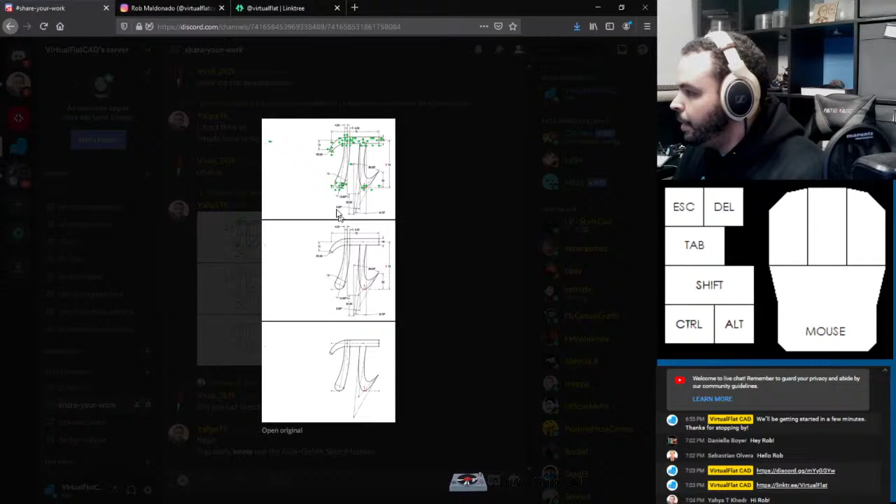Also, Yahya showing the method to his madness, publishing some of the dimensions that he used to make the pi. Very, very beautiful work there. And what I love about your sketch here in particular is that it's one thing to just go crazy with splines, but I can just see by inspection here that he uses mostly analytical geometry. Analytical meaning lines, arcs, ellipses, just those basic types. I see only 2 style splines there. So it's not only very good, very accurate, but it's just a beautiful example of generally efficient sketching. So, hats off to you there.

Sebastian: hey Rob, do you know if 3D Connexion gadgets are really worth it? 6 degrees of freedom mouse. Oh, that's an interesting thing to bring up. So, I'll catch you guys up if you haven't used it. So, what he's talking about, 3D Connexion with an X, I think. Oh, that is way spelled wrong. There we go. So 3D Connexion, they sell mice that look like this. So the idea being,

you have this device on your left hand, assuming you're right-handed like I am. If you're right-handed and use your regular mouse with your right hand, you'd have this in your left. So what you would do is you'd push this knob around. You can push it forward and backwards, side to side. You can twist it and also push it up and down. And what this does is that it links to the camera in Solidworks and allows you to rotate it very fluidly.

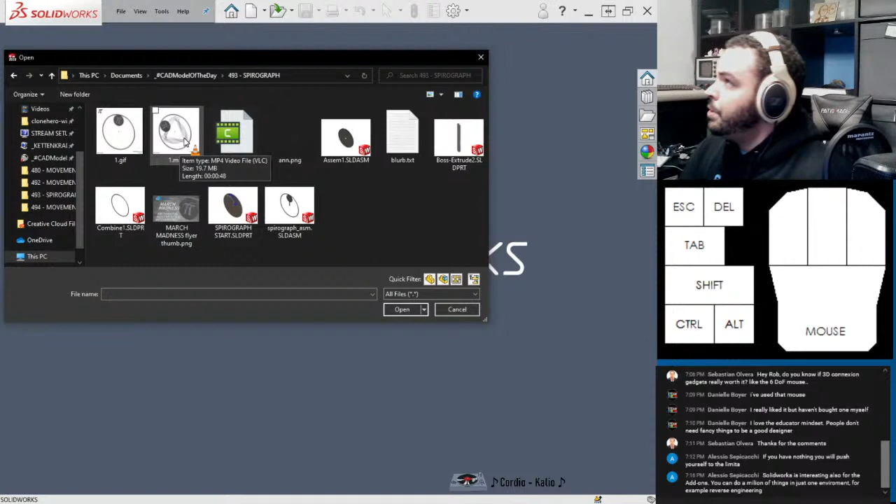What I ended up doing was I just kind of randomly picked values — okay, the ring gear is going to have 300 teeth, and the planet gear, technically, I said okay, let's make that 96 teeth, and let's put the spiral like this. Then when I ran the motion study, it turned out to basically generate a sunflower pattern, and I was really pleased with that. I just kind of published it as is. But I think this is going to be a good opportunity to really play around with some values and see what kind of shapes we can get out of it.

Alessio said SolidWorks is interesting also for the add-ons, you can do a million things in just one environment — for example, reverse engineering. Oh, totally agree.

I think one of the main benefits of SolidWorks, and this comes out as a double-edged sword sometimes, is that the integration between SolidWorks CAD modeling and SolidWorks simulation is so good. You can have a 3D model, click a button, do a basic simulation, is it not right? Go back to the CAD environment, make that thing a little thicker, hop back into the simulation just by clicking a tab, and run it again. It's so wonderfully efficient, and when it works like that, it's chef's kiss, beautiful.

Other things, I think with other software that's been quote unquote integrated, there's some work left to be done. The integration between SolidWorks and SolidWorks Visualize can be improved in my opinion. Many people, even ones that don't know the history of SolidWorks Visualize, can tell it was not previously a SolidWorks product. For those who don't know, SolidWorks Visualize used to be Bunkspeed, which, to its credit, is a fantastic photorealistic renderer. It's great - once you learn how to use it, you can create amazing scenes and renders with it. But the integration is very awkward between SolidWorks parts and SolidWorks Visualize.

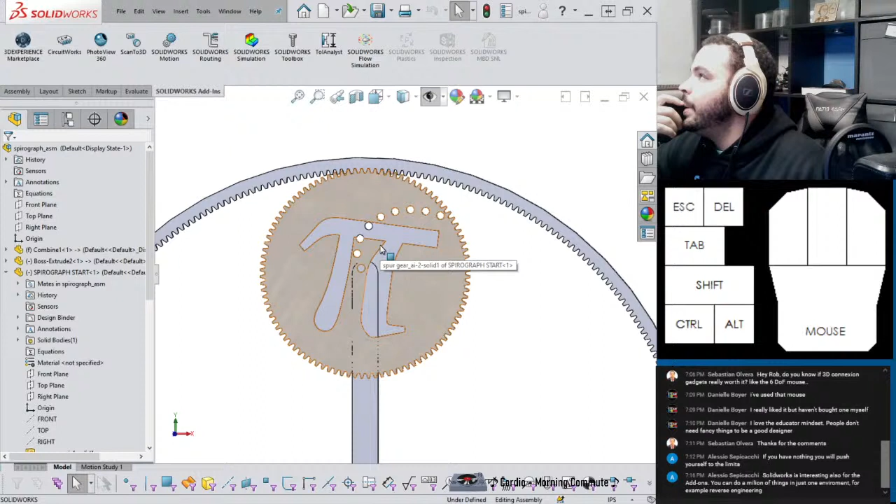But let's take a look at this doodad. One of the things I need to do, going back to what I said about basically just picking a bunch of random values - I used the SolidWorks standard gear set and then saved it out as a dumb solid so I can do all of these modifications to it. I want to see if I can get the ability to change different size gears, just to see what kind of effect that will have. So I think that's the thing I'll work on.

Well, actually, no - let's just see what I got here, right? Let's just go over what I did. Yeah, I know I'm all over the place, but let's review what I did for Pi Day.

First thing you need to turn on SolidWorks Motion, because the spirograph is done with the plots and results function of motion analysis. So you do need to have motion analysis, the SolidWorks Premium thing going on. It is what it is, but if you have it, make sure you actually turn it on so you can see the wonderful thing.

So, pulling back the curtain a little bit - in reality, when you have one of these spirographs in real life, it's kind of up to the user that when you put the pencil into the little gear and move it along the track, you're moving the pencil in such a way that the gear doesn't just pop out and ruin your drawing, right? But SolidWorks is not smart like that - you have to kind of tell it, go along this path, right?

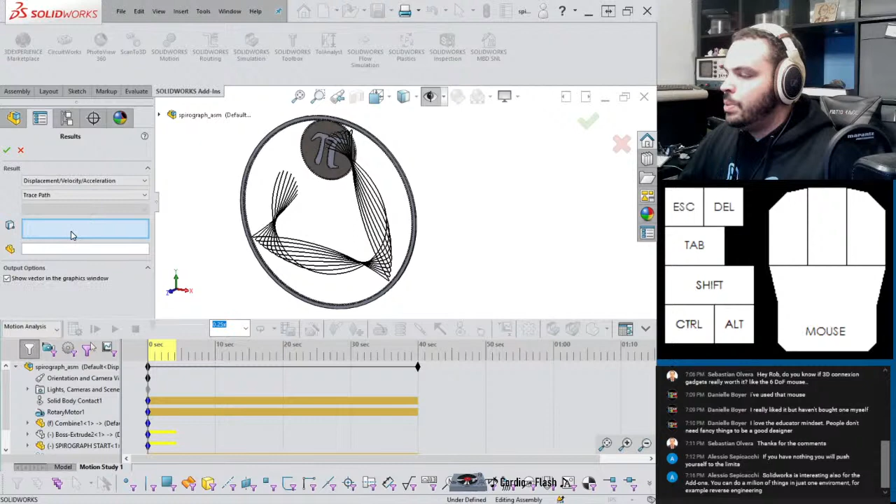In this box, you select a vertex, a point, or a sketch point that represents what you want to keep track of. So we could say maybe this little corner—where does that thing go? You can see because it's calculated some of it, it just shows up immediately. But if I hit calculate, you see now it's keeping track of that point too, which is making an interesting shape, like this triangle.

Okay, yeah, it's super fun to watch. It's honestly one of those things that I could just sit here and watch it all stream, but I know you guys didn't come here to just watch me watch a bunch of pretty lines.

But yeah, I need to reconstruct my model a little bit so I can actually pull a gear in from the SolidWorks toolbox, and then on the fly I can change the number of teeth the gear has and just see what it does.

So I think I did this in inches. This is power transmission—it's a gear, and it's a spur gear. I think it memorized my settings, but I'll make sure. Yeah, I used a diametral pitch of 24.

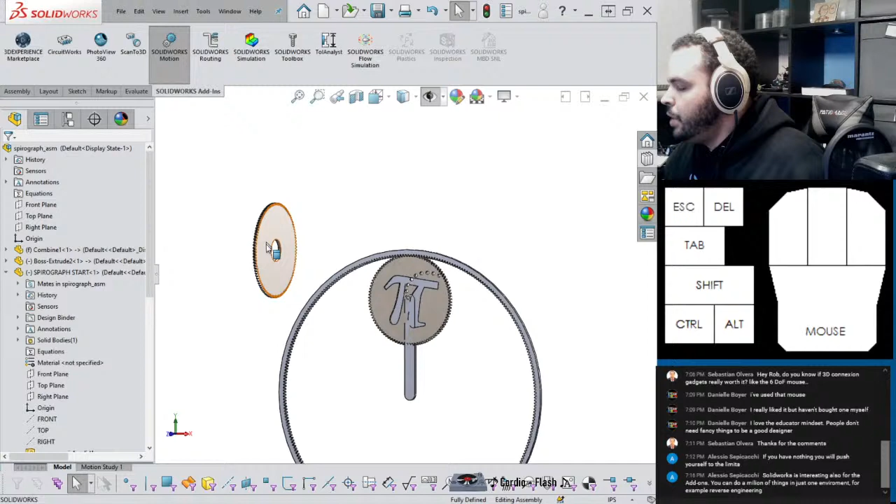And I might even remake this, since this is a dumb solid and won't be able to listen to any changes from this gear. So what I'm going to do is just suppress this. Sorry to see it go, but these things happen.

So now just starting to mate this in place. Okay. So I'm just going to try to get the teeth in there as best as I can.

There should be a couple of sketches in the SolidWorks toolbox part that should have the actual pitch diameter of the whole thing. So I might have to open up this thing read-only just to see what kind of sketches it has. Yeah, that's cool.

So what is this? Okay, this does not have what I want. So that's for the revolve itself. Okay, I think this is what I want—tooth cut sketch has the diametral pitch circle right there.

Let's see if we can get this to show up—that'd be pretty nice. And actually this one doesn't have it either, but I can add it, I believe, if I just go ahead and say this.

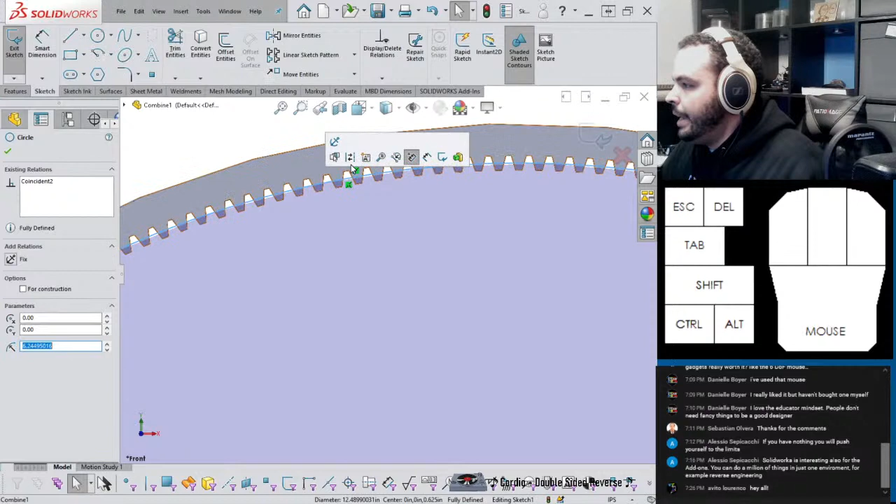But I'm making some edits first, just so we can have some real fun with it. I want to actually play around with a bunch of parameters and hopefully just see it spit stuff out in real time.

Okay, so we have that there. So perhaps I can say this and this be tangent, and that fails, likely because the sketch is in the wrong plane. So I can't really change the toolbox part, so I'm gonna have to change this—but practically no work is lost. I think I just have to change the sketch to this plane over here. Let's see what that does.

So with this tangent, then that works. So yeah, you see? And then—yeah, this is gonna be interesting.

Yeah, I might have to manually adjust the actual meshing of the teeth, which is fine, but the thing I want to happen automatically is the length of that basically driver arm that I just set to hide.

But yeah, so let me take this spur gear. So let's take the origin, and let's say you will be coincident to the right plane, and I'll go into mates and even rename this. And this is to reset the spur position. Oh, I typed in a plus, but that's okay. So that's something I have to remember to suppress when I try and run the motion study, but just so that it's not wiggling around on me. Having it stuck in place will help me for this next bit,

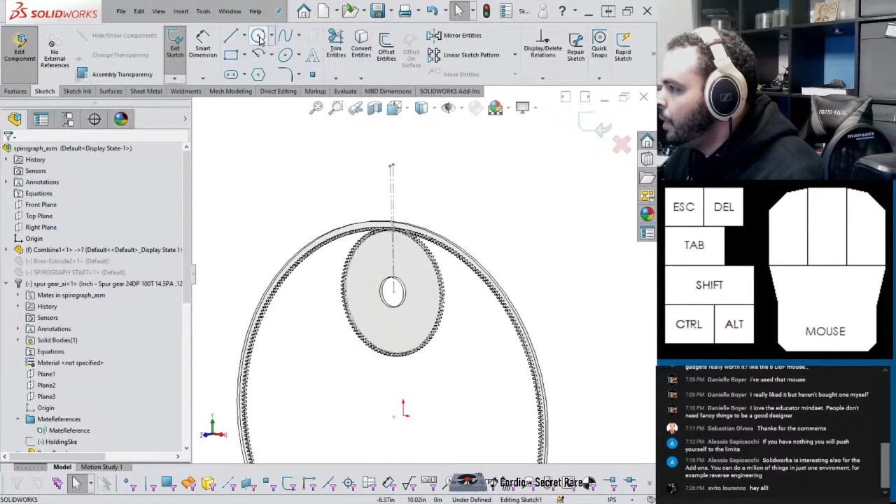which is to create a new part. So I will say, let's sketch on the assembly front plane. Grab a slot, and I need to be careful how I do this. So I'll put that coincident there, and I'll put this coincident to here. So two external references to basically define the length of this.

So why did I do it like that? There's something really subtle I did, and notice it's because I didn't really draw it like this. I didn't just draw it straight down and then do this. Difference being, just drawing it straight like that adds a vertical relation. And being that this thing has to rotate, this vertical might actually cause us trouble. So I'm trying to just use basically the perfect amount of relations. And then I can just arbitrarily define the radius. It doesn't really matter. It's critically the length and where the two endpoints are.

Alright, so, whoops. Actually, I need to go back to this edit component, because now I need to extrude. And let's see. Looks like my plane was a little bit off, but I think this might be fine. Yeah, because what I can do, and I'll show you. So let's just give it a thickness. This is fine, just leave that as is. I'm going to delete this. Well, not delete. I'll suppress this in place mate. I suppress because if something gets really goofy and I need to stick it back where it used to be, I actually can put it back where it originated.

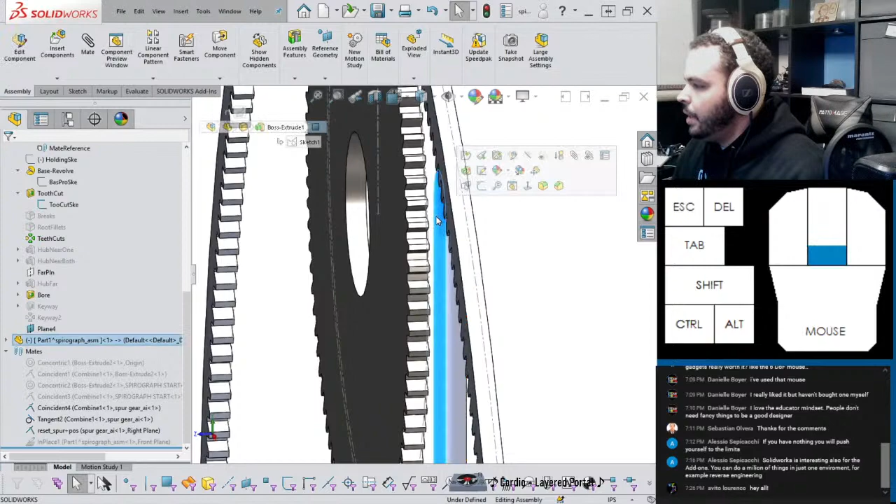So now I can just say, make that coincident, make this concentric, and this with the extrude to surface and call it a day. I could do that. Reason I don't is sometimes it can get a little bit screwy when you're trying to extrude to surface and things are moving around, because a lot of the times you need to see enough surface to actually go up to. Although I think in this case, since the up to surface is a planar surface, those are like the most well behaved. I think that's also an acceptable solution for that.

Alright, so what we should have here, I made that coincident, this coincident. If I turn off the reset spur position, I should have this rotating about this. Keep in mind, the spur isn't going anywhere because I'm actually going to use solid body contact to take care of the rolling. But what I'll do is test. If I go right click and say edit toolbox component, I'll actually make this internal hole smaller. So that's the nominal shaft diameter. Maybe I'll put that all the way down to like a quarter or something. Yeah, it's looking pretty good.

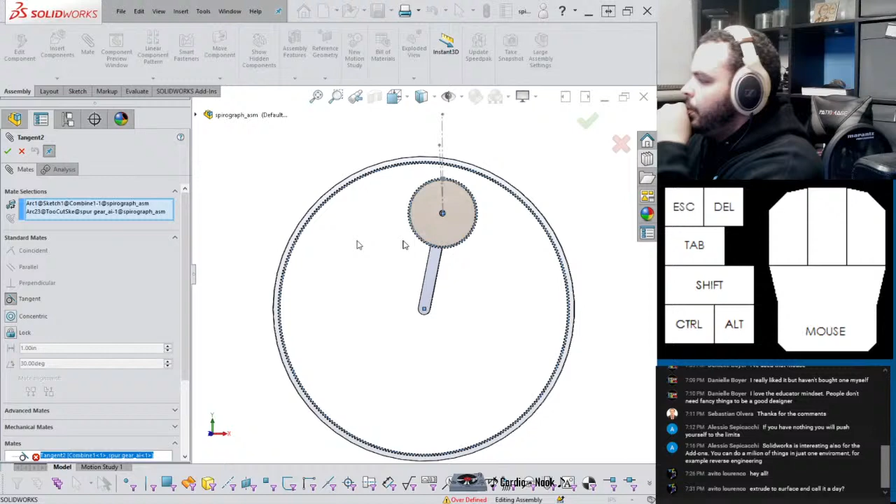Pretty good. But the most important thing is I take the number of teeth, and let's say I set that to 70. Okay, I heard a ding of sadness. So what is failing here? So what happens if I just hit rebuild? No, it hates that. Okay, so what did I do? I think I might have created a circular reference. Let's cancel. It's all good.

Troubleshooting 101. Can I show... What am I looking for? Hidden tree items. I forget what they're called, but maybe I'll see. But you can actually see the external reference. I think they're called pointers.

But I think what's happening here is that this gear can't be tangent to the teeth unless this member gets longer. But this member can't get longer until this moves to the teeth. So it's creating a chicken and egg scenario. And in SolidWorks, that is called a circular reference, and that's something you want to avoid. Even if they don't outright cause errors like this, they can be very brutal to performance, especially. So we'll figure that out here.

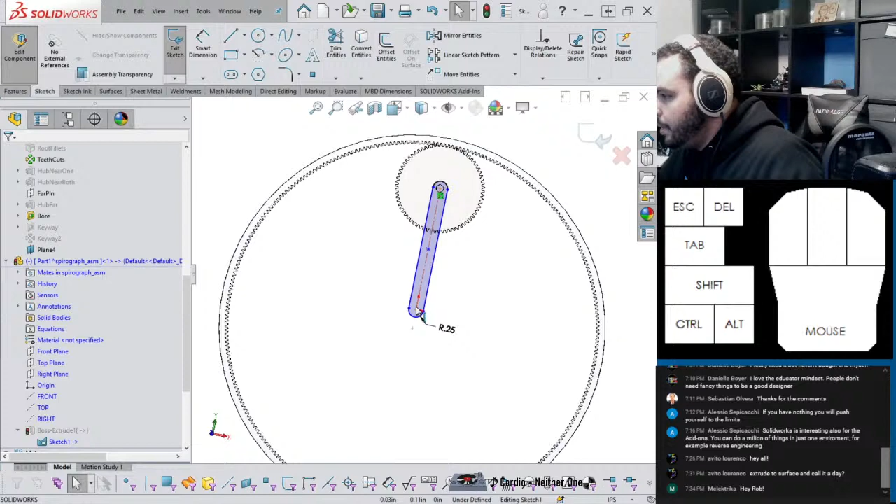Okay, so I think I know how we can fix this here. So I mated this, or not mated, excuse me. Let me be specific here. I put a relation to the endpoint of this line to the part origin. I think if I delete this and instead of grabbing the part origin, which is in blue, grab the assembly origin and say coincident, now that should create a case where it's able to stretch properly and not create circular references.

Okay. So let me try edit toolbox and just change the size of this. Okay, so we outright didn't get an error this time. But now the sketch is always going to the assembly origin. I might be able to turn this back on and get no errors. Okay, so far so good.

So I'll even turn it this way. So if I go edit toolbox component, and not diametral pitch, not that, just change the number of teeth here. It might be just something that I have to just turn this off so it rebuilds and on. Yeah, I'm good with that.

So there is a circular reference, and there may be a way of circumventing this. And yeah, I know there is, but you know, just wanting to get on with the program, I find that acceptable. So when I change the number of teeth, it's just gonna throw an error. But I turn this mate off so it can rebuild and just turn it back on so it sticks. So yeah. Let's save.

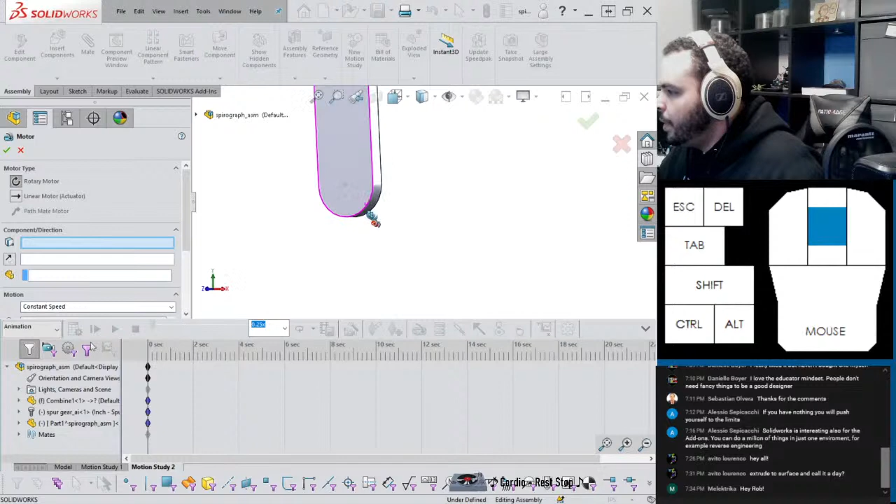And for our motion study, I might even create a new one. Assembly, new motion study. And we'll start by just driving a motor. 12. And say we want solid body contact between this and this. And then I want to hide this. Hide. So now this should go around once, and you should see the gear turning. So let's see.

Well, actually the frame rate is so low, I can't actually tell if it's working. So let's just let it do its thing here, and we'll take a closer look at it once it's finished thinking about it. Oh, I also have it at quarter speed. So let me replace key. Oh, I'm in animation.

I'm so dumb. Thank you so much, Alessio. You see, it happens to anyone. This is literally what I was talking about. When I say, like, yeah, it happens to anyone. It's been a long day for me. It's like, why is the frame rate so low?

And that appears to be working. Let me make that slower. Oh, if it wants to. Yeah, so now that's working.

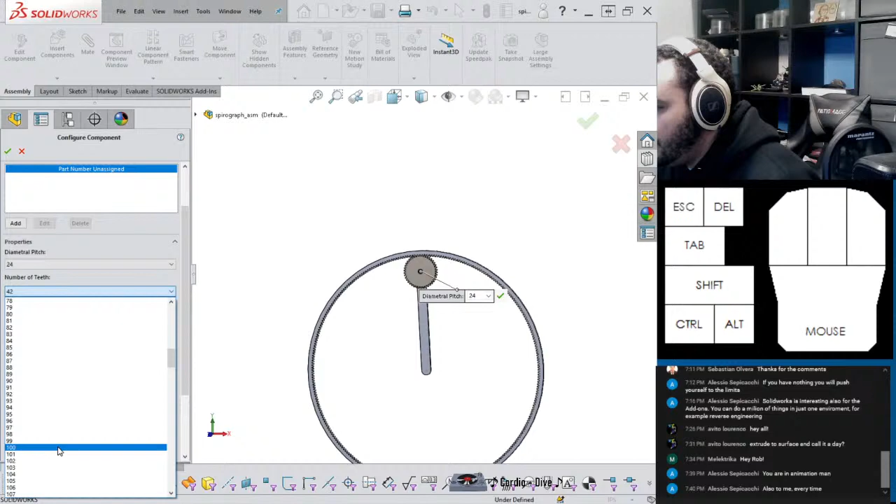So let's change the number of teeth. So 100, it's gonna error. It's okay, but we turn this mate off and then turn it back on. And then go here, the updated position, which is cool. That's fine. And now we should have this. Let's just replace the camera key so we see. Oh no, I have to recalculate. I hit play instead of recalculate. All right, so that is functional.

So what I will do now, this next part is going to be interesting because I'm not really allowed to modify this toolbox component. This gear is a toolbox component, and they're read-only. But what I will try is to make the actual spirograph bit. It's a new part. Sketch on the face of this gear and just say convert entities.

And this might take a second because there's quite a few teeth. I saved, so I think this will work out just fine. Yeah, this may not be the most computationally effective way, but we'll see. Boy, howdy, that's a lot of edges, am I right? So let's do that, because I think eventually... And what I might even do is have it extrude to the other way.

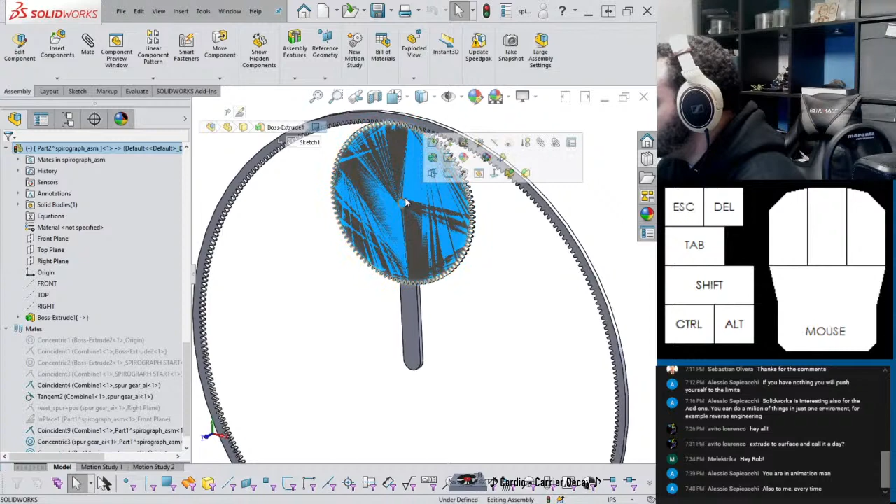So what I think I can do, the toolbox component, we can just hide, honestly. And let's just, again, test. Like the key to being successful with animation is frequent testing.

It's easier to kind of figure out what's going wrong when it's like one step at a time versus it's just happening all at once. So yeah, you see the entire gear change. So that is completely functional.

All right, so I think we're ready to make the spirograph bit, and this shouldn't take so long. How do I want to do this? Questions, I tell you, man. I might make that like an independent thing. So I'm gonna start. So the way I did this on the other one, I started with a small circle, like this, and then I used the helix and spiral command.

So it's going to be very important that I don't put any relations to any of these teeth, because if you recall, it's pulling those edges from the gear. So if I put like a coincident to this tooth and then I change the number of teeth, that specific tooth might be gone, and that's going to cause errors in this part. So I'm going to avoid snapping to any of these teeth.

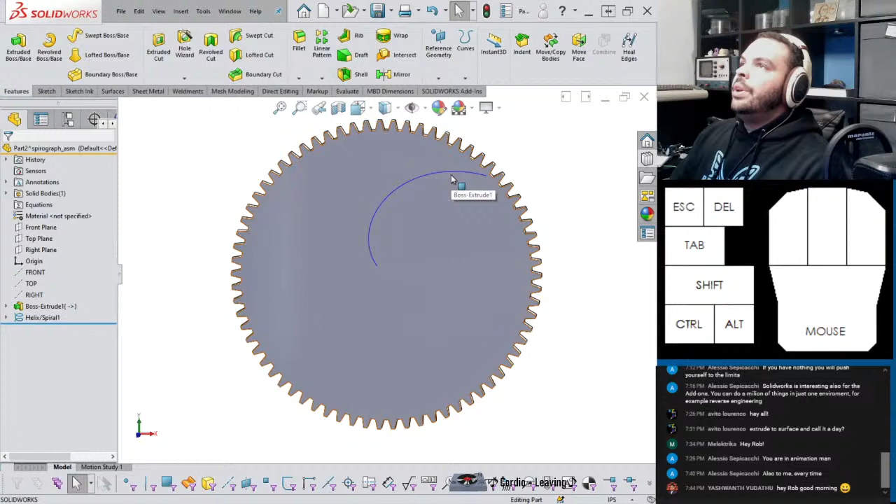So with the spiral, I can start with this base circle here and have a spiral just kind of projecting out, and you can kind of play around with different aspects. So I might just go in and manually change this as I change different gear sizes. But yeah, let's do that. Alright, so now we have a spiral. What do we do with it? And how do we get the holes that you saw in my spirograph?

So I'm going to start another sketch. Click on the spiral here. We're going to convert it. So that's step one. That's easy. Step two is something you might not have heard of, and usually I end up searching for this command. So I can say search commands, and the command I want is called segment.

And what segment does is allows you to put in a curve as an argument. You click on a curve basically, and what it does is it just splits it up into an equal number of segments. So I'll show that here. If I click on it, I can say, well, can you equally space 5 points about this curve? And you know, that's absolutely what I want. So just something like that, pretty much.

Avito, is there a more efficient way to rasterize a toolbox component? I think what you're getting at is, is there an efficient way to basically do exactly what I'm doing right now, where basically I'm taking a toolbox component and need to modify it in some specific way. Honestly, I think you could save the read-only part into a regular folder and then modify it how you want, but SolidWorks flags it as a toolbox part, and that causes some quirky things to happen. I think you could probably do a save as, but yeah, I just chose to go about it this way, I suppose.

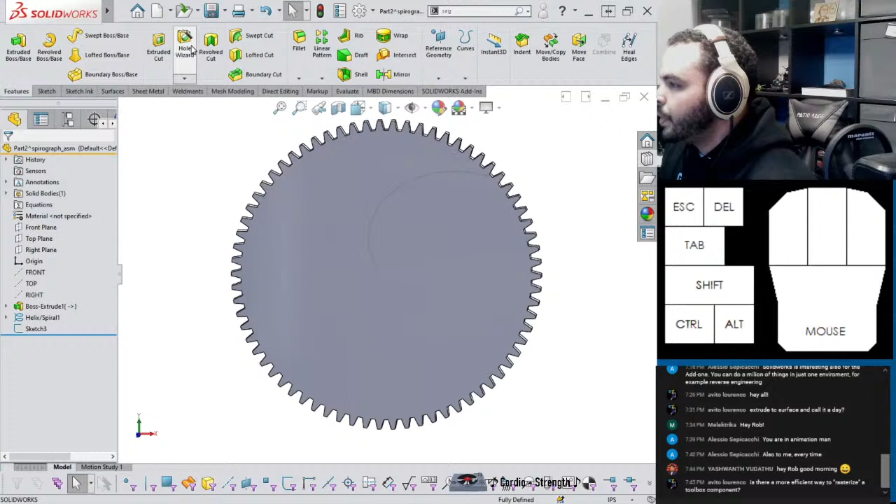Hole wizard. So I'll get some holes here. And for positions, I'll sketch on this plane. Oop. And just kind of snap these. I think that might be too close. And what I'll do is make these holes smaller. Okay, and that's a spirograph in essence, pretty much. So I can hide this. Well, actually, no, I do want to keep that around, but I want to hide the spiral. Keep sketch 3 around because I can actually pick those points when I do trace path.

So let's go back to our assembly, and we're practically on the cusp of just having everything we need. So going to our new motion study. Gonna have to recalculate. So that is rolling. That's cool.

You have to delete all references for the configuration and create a new one. Yeah, otherwise you screw up your toolbox. Yeah, Alessio has it right. I kind of just stay away from it. And you know what is interesting to note is that if you go into your system files, if you're brave enough to do that, here I'll show you something, if I can find it. I won't go too much out of my way.

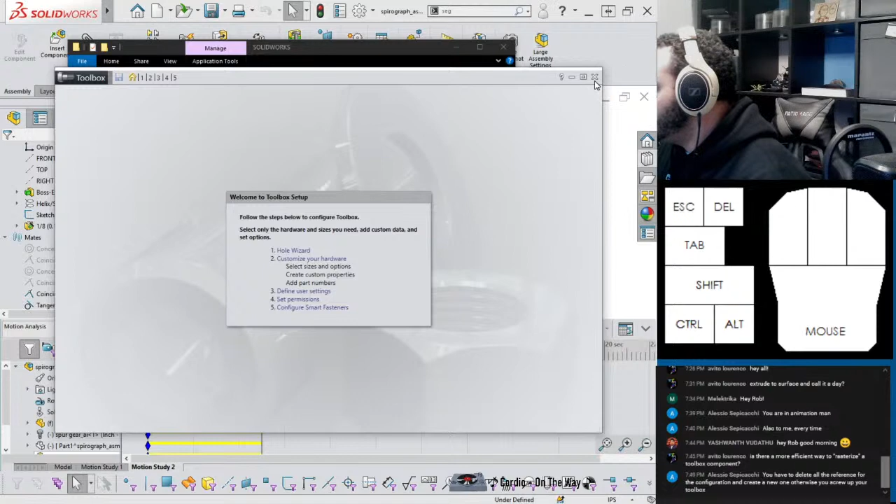But for example, if you go into your program files and say SolidWorks Corp, SolidWorks, there is an exe here. Yeah, this one, SLD Toolbox Configure.exe. So this is found in C, Program Files, SolidWorks Corp of your year, SolidWorks, and then this thing. So what this tool is, oh, actually no, that's not what I want. You can create new toolbox component. It's this one, Toolbox Updater. Is it this one?

There is an exe here that you can feed a toolbox component that you copy, and you basically say, I want SolidWorks to mark this as not a toolbox component, and then it just becomes like a regular part. That's something I would have to look up. I used to know it a little better when I was in tech support, but that is a tool that exists.

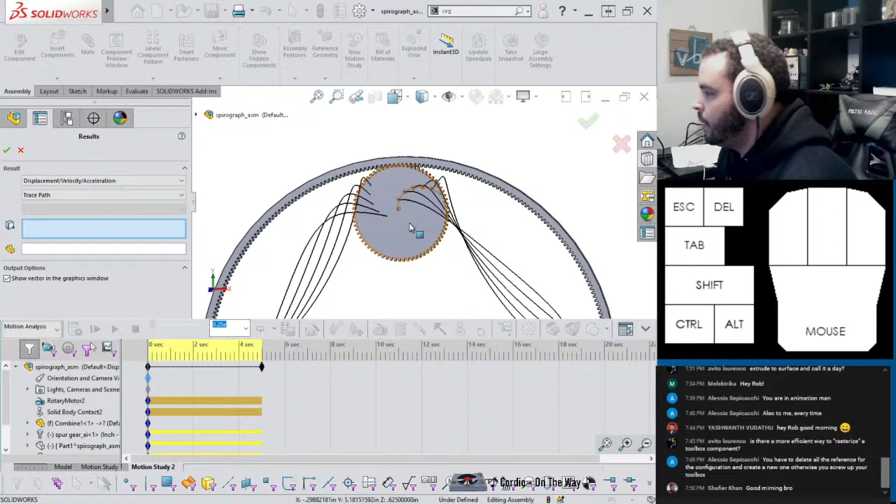And looks like we got one more, at least for the version of this that I have. Motion study. Oop, just kidding. This. Trace. Alright, so there's our paths. So let me get this in place. Replace key. And let's bring this out to 30 seconds. And let it calculate.

This is really, really cool. Yeah, so this is very similar to that sunflower pattern I was getting. But you can control how many points this has by varying the gear ratio, basically. So something I can do, I know the ring gear has 300 teeth.

Oop. No, I meant to click back into model. So if I go here to the toolbox, edit, and set the number of teeth to 100, which divides into 300, gives you 3. Off, on. Let's see what that does to our shape.

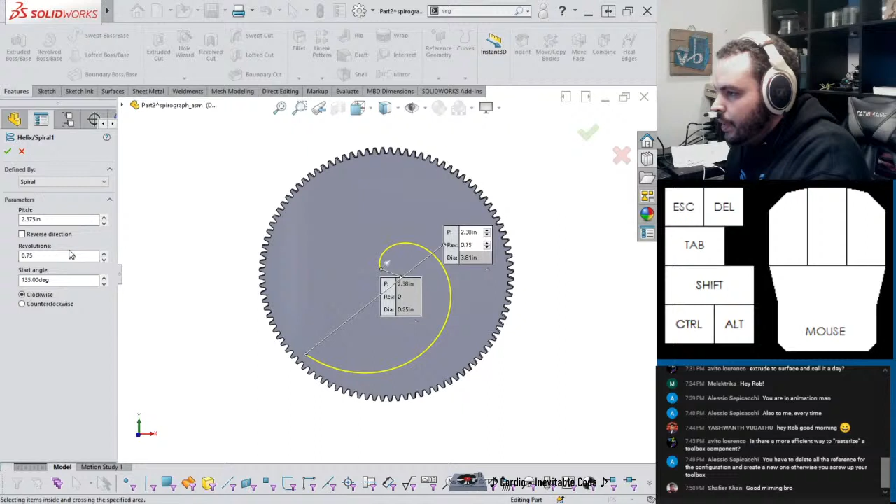So what happens if I bring the pitch down to 2, maybe the revs up to 0.5, I meant. Maybe a little more than that. Okay, so let's try something like that. So you see you get something like that. Because I used the segment command, it automatically updates. So we should be able to just go back into our spirograph and run this. Yeah. So now they're a lot more spread out.

All right, what else? So let's go back in here and say, oops, that's not what I wanted. Let's change the number of teeth again. So I bet if, instead of having 100, we have like 99, ever so slightly off. Yeah, let's give it a second to error out and we'll fix it right away.

So now we should get a thing with a lot of lobes. So it should be, yeah, slightly off. This one's turning out to be cool. Wow, those lines are getting kind of dense, huh? Yeah, and I could even let that keep going. I might even, instead of having this have so many lines, just hide all of these plots.

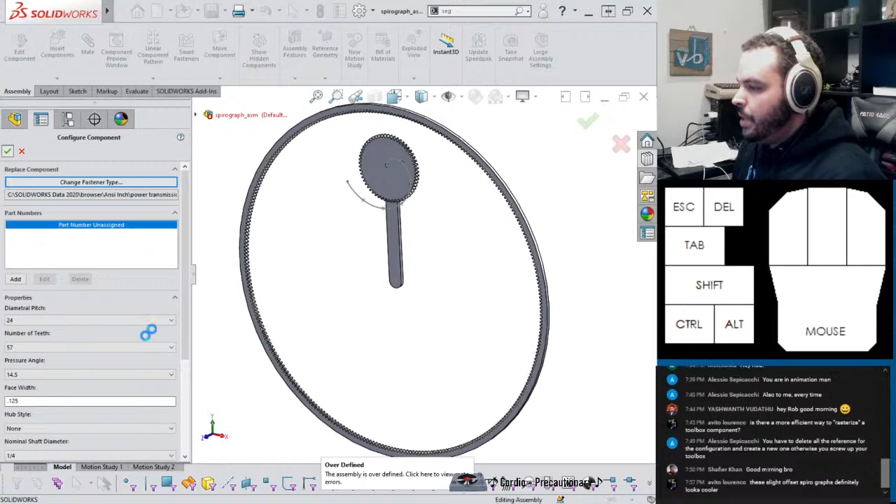Avito saying these slight offset spirographs definitely look cooler. Yeah, I totally think so. And I think it's really because... oh, that's really interesting. A couple holes failed. Oops, I did the wrong thing. Yeah, I think because they're so close it makes this very nice ribbony thing. So what I think is going to be interesting here is that the point we're tracing is actually outside of the gear, which makes the hole fail, but it's not against the rules in terms of tracing a path.

Let's see. Oh yeah, this is what I'm talking about. Oh boy. This one's really cool. Because 57 is just not very evenly divisible, this would keep going for a very long time until it actually meets back up with itself. I'll try something a little less stunted like that. And maybe I'll try with a point way out there.

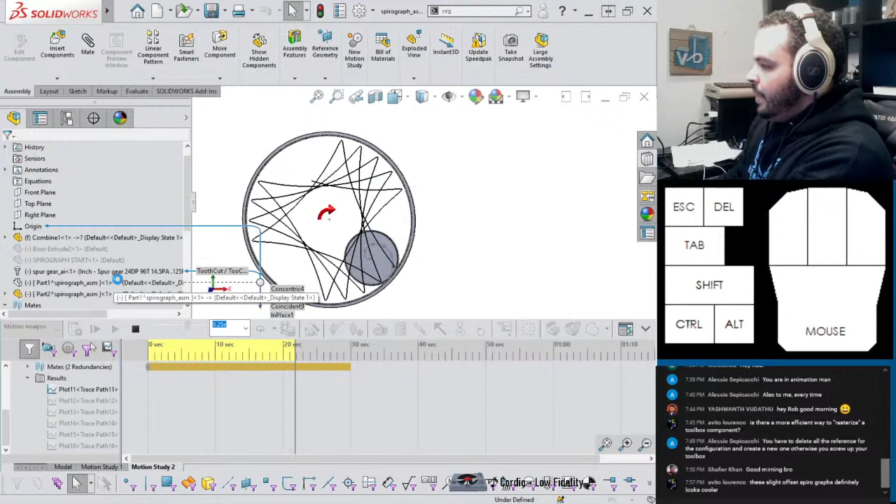So let's, not diametral pitch. In my post I actually had 96, so it actually makes 25 lobes. So the sunflower shape has 25 petals in it basically. I might do one or two more and then I'll actually get onto the CAD model today because I've been streaming for an hour now, but this stuff is so fun to play around with. Yeah, that's so cool. It's basically making a flower.

So put this here. Actually, let me go in here and say, with the helix, let's just bring this sucker way out. Actually the holes are okay with it, which is weird. I would expect this to error out, but okay. So the point we're keeping track of, I believe, is this one. This is going to be interesting. Whoa. Okay, I'm gonna have to zoom out a bit. Hang on.

I think I'll make this one my last one, but this thing is so cool. Oh, it's like making a donut. That's so cool. Oh god, that's so satisfying. What do you think about that, guys? I really like this one. I also like donuts.

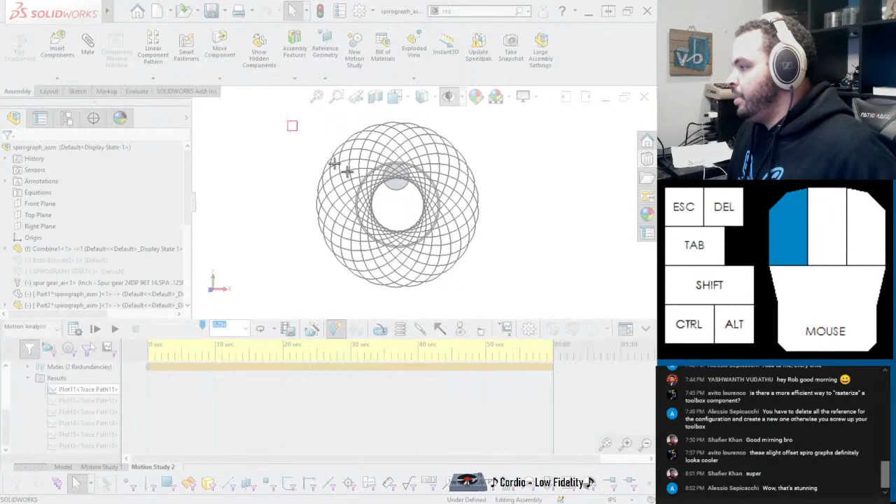I think that's a good one to leave it off at, as then I'll go to the actual CAD model right now, but let me know if you enjoyed that, cause I sure did. I really enjoyed that. Let me take a screen snap. I honestly didn't expect it to be this beautiful, but math is beautiful, man.

It's a shame that a lot of schools beat the amazingness out of mathematics and science because of a bad teacher, or a curriculum that is not accepting or inviting. That's why it's important, that's why I'm doing this here. This stuff is fun, and having free access to my videos is one thing, but just to have it be fun, you know.

Oh, sick. Avito, you said you got the email regarding my new SolidWorks user group opening. That's awesome, my dude. You're gonna have so much fun, I'm telling you. I don't know what your plans are after the pandemic is over and we can visit each other freely again, but once you get people visiting in person and showing off the coolest things, in-person demonstrations and interviews, it's a very fun place to be in. And I know I've talked at length about that.

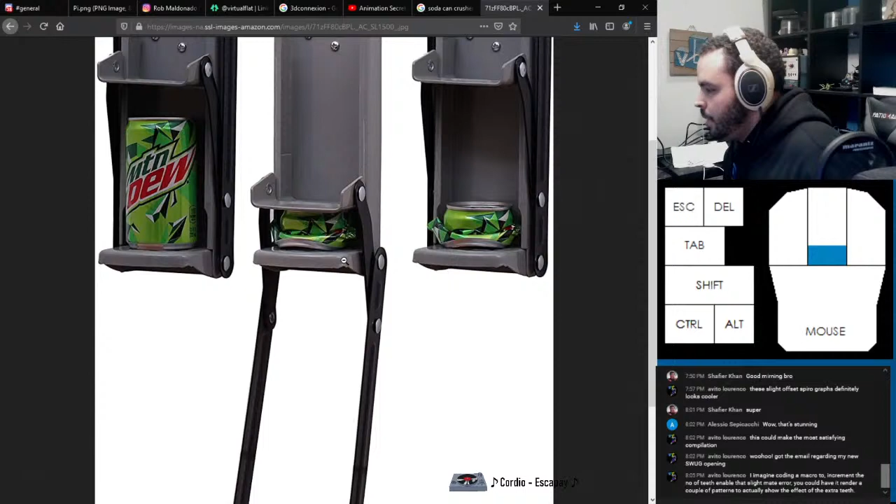Yeah, I think I'll use this as my reference image. This one's very nice, just to have it in its various stages of operation. So I think what I would have to start with, and I might have to just make up some dimensions here.

Yeah, this is totally doable. Let me move this to my other screen. Put that over there, and put this over here.

Avito, imagine coding a macro to increment the number of teeth, enable that slight mate error, and have it render a couple of patterns to actually show off the effect of extra teeth. Actually getting into macro writing is something on my bucket list. I've never done it before, but I think that could be massively helpful. I've just seen the amazing things people can do with macros, it's just one of those things I keep putting off, man.

Alright, so I'm just gonna start with the sheet metal base. So it looks like almost like a plate, it's very thick. So I'm just gonna call this 4 inches.

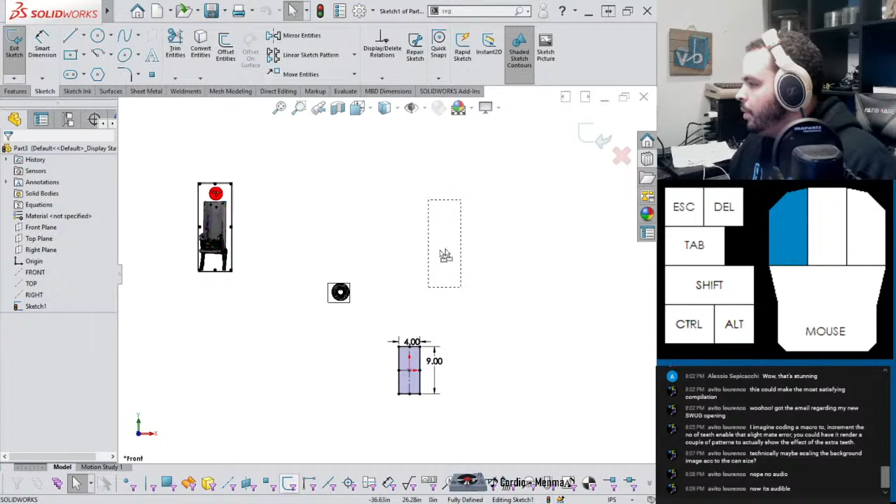Yeah, so the reason I don't want to use this as a sketch template is it's not like 507 Mechanical Movements, where it's just black and white. This is full color, so these kinds of things are kind of tough to sketch over. So, we're making the back portion.

And I think I'll just throw that to sheet metal, so let's use the gauge table. Whoops, oh, so I have to still select the table. Alright, steel, so now we should have another field come up. Let's try 10 gauge, okay, so that's pretty decent thickness, I'm cool with that.

Alright, so now we have the tabs that come out that actually capture the slider in there, so I'll accomplish that with edge flange, like this, and let's have the bend towards the outside like that.

Let me think here. Yeah, in the picture, I'm just going to pull this up. So I'm modeling this flange here, this one. It goes all the way down, but then I believe it stops to actually make room for whatever this thing is that I'm tracing.

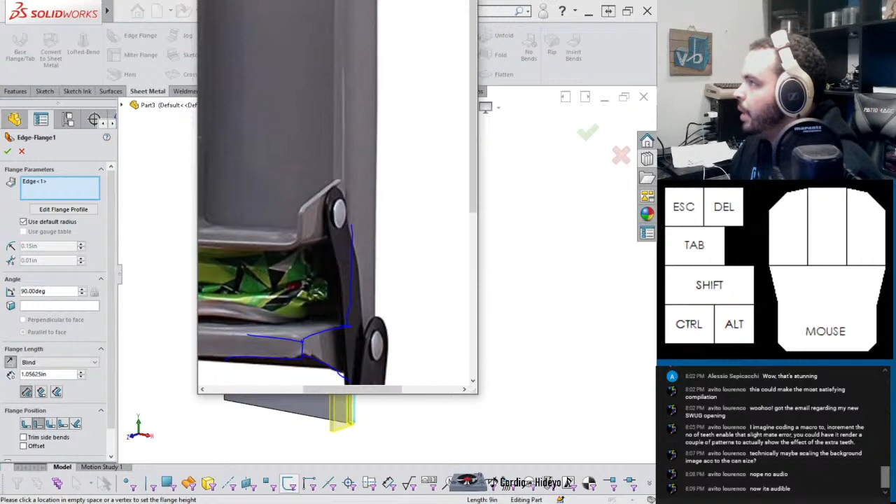Right now, I can do that by editing the flange profile, taking this and just kind of ripping it out of there. Now I can define it, like that. Sketch is valid.

Yeah, and I believe we can mirror this, so I won't bother doing it to the other side until I get this a little bit closer to what I want it to be.

There we go. Yeah, so I think one of the pieces of equipment I need to get for my stream is a mixer. I've actually had this where I stream to my friends over Discord or something, and the audio for the thing I'm doing will be a normal level, but it'll be way too loud for me, and that's what's happening here. But just putting the headphones sillily on my face actually works pretty well, so I'll just leave it at that.

Have the bend towards the outside. And actually...

So this ends a little bit, so I need to go back and edit. Although, I don't need to have it be exact, I can take some liberties. The important thing is I need something here to actually catch the slider. So I can do that.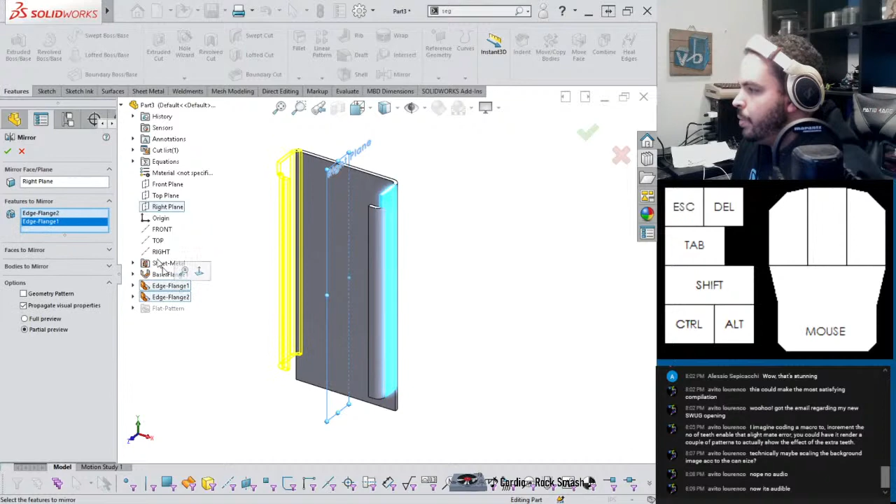We have something like that, and I actually may go for the mirror now, mirroring about the right plane. We also want edge flange 1, and let's give this a save.

Alright, and now to make this bottom portion here, I may just make it a solid and then just shell it, because this is clearly formed. This is not just regular bent sheet metal, and it looks to be formed.

So how can I do that shape? I will draw its profile as seen from the right plane. Let me adjust my mouse to Solidworks mode. Like that.

And I'm just going to give this some random dimensions.

Oh, hey Kuronite, good to see you. We are making a soda can crusher.

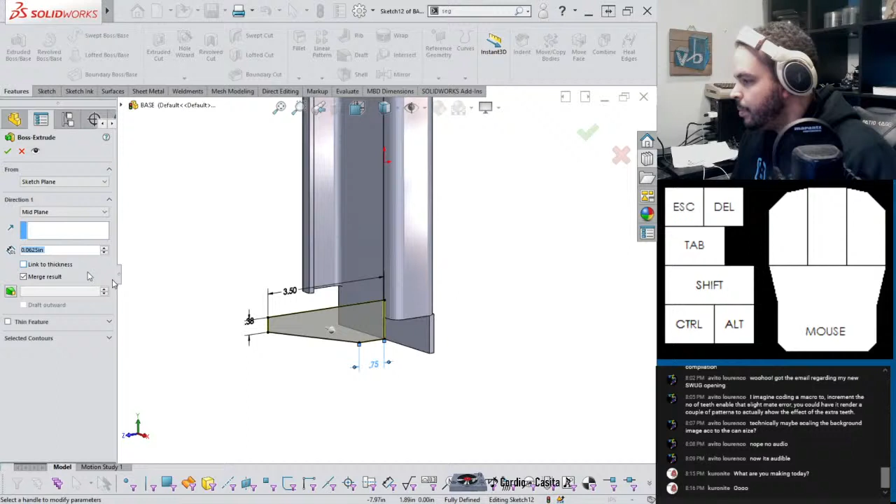For... uncheck merge. And, alright, how do I want to do this? Let me sketch here because I do want to make the end rounded. Let's get a 3-point arc, like that.

So if I can grab the midpoint of this and say coincident, that should put that fully in place. Then I should be able to go to extrude cut and say through all, and destroy all the material on this side. There we go, we get something like that. Save. And now let's get some fillets.

I'll start with these, which will be on the larger side, and then this, which will be on the not so larger side. That's pretty much it. So what I'll do is I'll shell. Yeah, perfect. Well, I might go back here and just hit those.

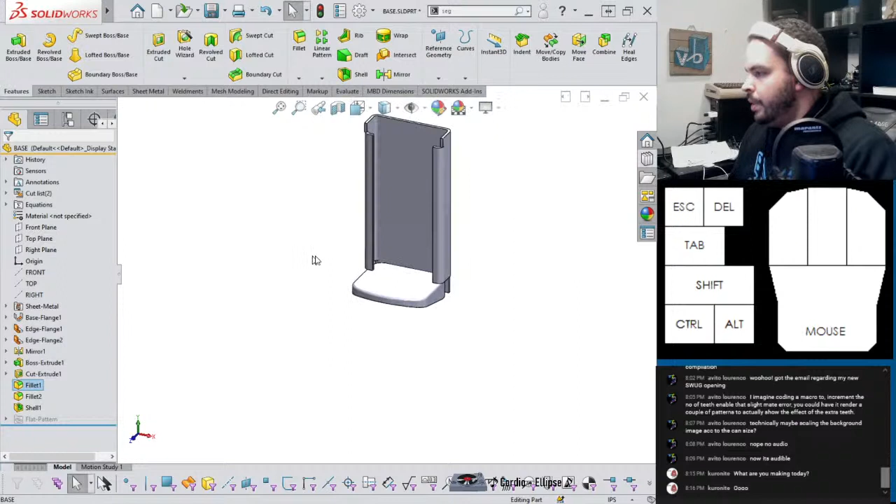Yeah, I'll just leave it like that for right now. Those corners are a little bit on the large side, but there's our platform, and I can actually keep this all on the same part.

So next thing I want to do here is the slidey bit, and I need a moment to study the picture a little bit. Let's see, so we have what appears to be just like a sheet metal U-shape pretty much, but it's got a notch cut into it that mates up with that very short flange that we modeled earlier.

Yeah, shell's pretty convenient, especially if you know how to set it up. I could actually make an entire YouTube video on doing quirky stuff with the shell command. Lots of things with it.

So how I want to do this, let me get my snipping tool. I want to draw the U shape, extrude that out. This is cut at the bend, so I would flatten it, cut the notch out of it, and I can cut this shape as well, then fold it back up. I think that's what I'm going to do here.

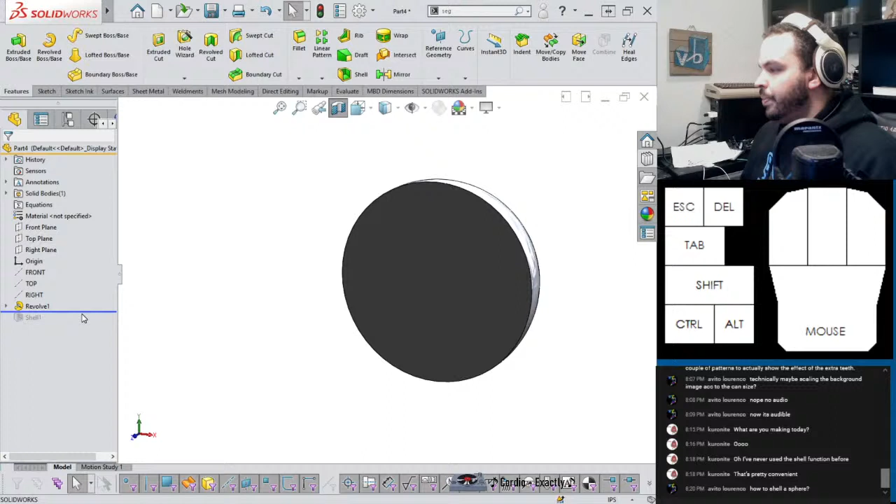So what trips people up a lot, and this is why I was saying I could make an entire YouTube video of me doing quirky stuff - you don't actually have to put any arguments in this box, you don't have to put any faces here. You could just leave it empty, which I think is one of the only features that do that, because with practically every other feature in SolidWorks you can't apply a fillet and not pick an edge, right? Just leave this box empty, but that's what you do here.

And if there's multiple bodies - so for example, if I put that back there and then say move copy bodies, say copy, and do that. Okay, that looks a little sus, but whatever. Then I run shell again, you see what happens, it intuits that there's more than one sphere, and you pick the one that you want. So if I do that one, shell, only one is affected, but not the other. But if I bring back the original... oh, I guess that fails. Oh yeah, because now this gains a body argument. So I guess when you have multiple bodies, you do have to tell it what body you're talking about.

There you go, we got some bowls or balls. Any rate, yeah, so that's the short on that, the little quickie on that.

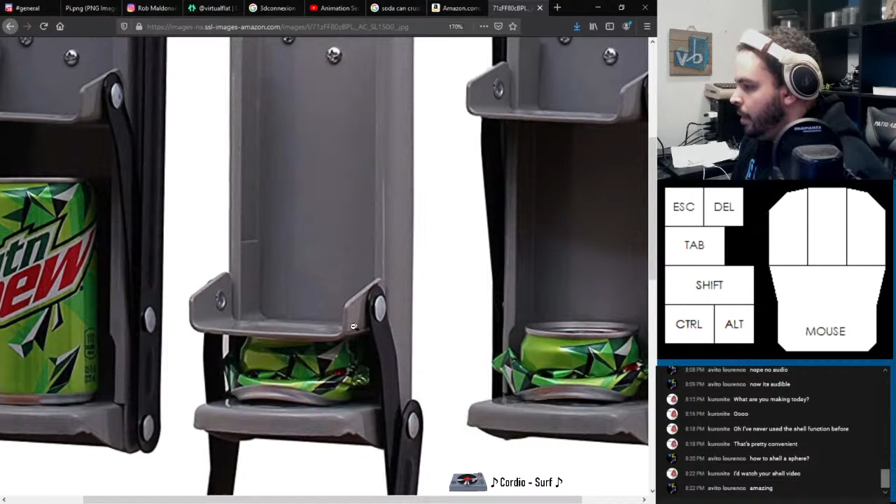But yeah, what was I about to do again? Yeah, this thing. All right, so I think I'll draw it bottomed out first, so I'll sketch here.

Amazing, oh I'm glad that helped you out, man. It's the thing that a lot of self-taught - there's a lot of SolidWorks content online, but SolidWorks is just so incredibly deep into what you can accomplish with it. It's very hard to know absolutely everything. There's videos like 'learn SolidWorks in 5 minutes,' and it's not a bad video - the guy shows you how to open up a part file, what a feature is, yada yada yada. But to reach expert or CAD master levels of proficiency, you gotta be putting yourself in these situations, which Avito, you're really good at. You think of great exercises, you suggest good video topics, I guess is what I'm saying.

But yeah, I can make the height of this, I'm just gonna call this 2.

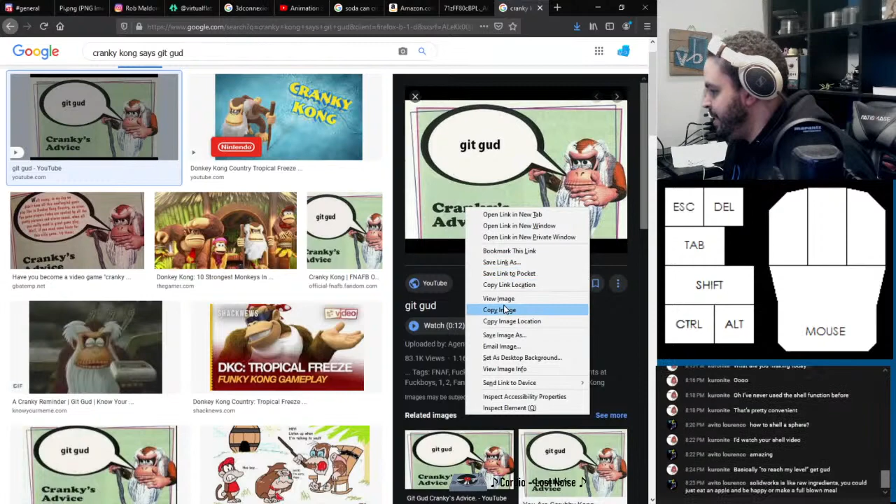Cranky Kong says get good. No, but it ain't like that, I promise. Okay, detour. Cranky Kong says get good. Yeah, I should just leave the video like this - the stream is just 1 hour of this image just showing up.

SolidWorks is like raw ingredients. You could eat an apple and be happy, or make a full-blown meal. I think that's a very apt comparison. That's a very good comparison. I think it really is like cooking. It's like you get better by practicing. You can learn by observing other people doing it. You can learn recipes, and so on. Like there's videos, and I have a couple of them.

It's just like, here's how to model a Peep, and I try and sprinkle good information, but it's like following a recipe. If you want to get really good at cooking, you could just follow a bunch of recipes and build like a library in your mind. But when you start digging into it, saying like, oh, if the cut of meat you're cooking is fatty, then you should do this to it. And this is where the analogy will start falling apart, because I'm not good at cooking at all, but it can be that deep.

Yeah, good old, yeah, and I sent you a Peep hair clip, didn't I? I should bring those back, honestly. I really enjoy making those.

Okay, so what do we need? To reverse the direction of the thickness. That's what we need. Excuse me. And how far does this go out? Good. So yeah, this covers the entire surface, which actually makes sense. So I'll just bring this all the way out. Let's just do a 3.5. Yeah, and that's all we need. Make sure there's no merge result here, so we can proceed.

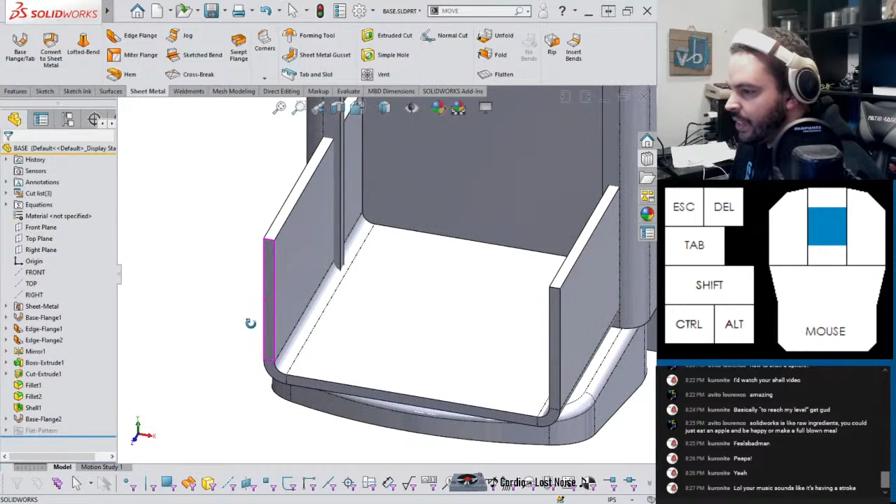Music sounds like it's having a... Yeah, there's a couple of songs in here where he goes ham with the oscillator. Okay, so something that bothers me, and this is such a first world problem. So yeah, no, it was the track itself. Kuronite. Yeah, it was just like that.

But what bothers me is you notice that my icon colors are different. They're legacy. If you install a fresh seat of SolidWorks, it will give you the choice between the light colored icons like this, which I don't like, because it's harder for me to spot the icons because everything is just light blue on gray on slightly darker gray. It's just not very noticeable to me. So I changed the whole thing to medium light, and changed it to classic icon colors because I like the green and yellow.

But if you look at sheet metal, tab and slot does not have a classic variant on it. It's the 2016 one. So it just looks weird by itself. But you know, I love you, tab and slot. That's another thing I can make a video on, although I haven't used that as much.

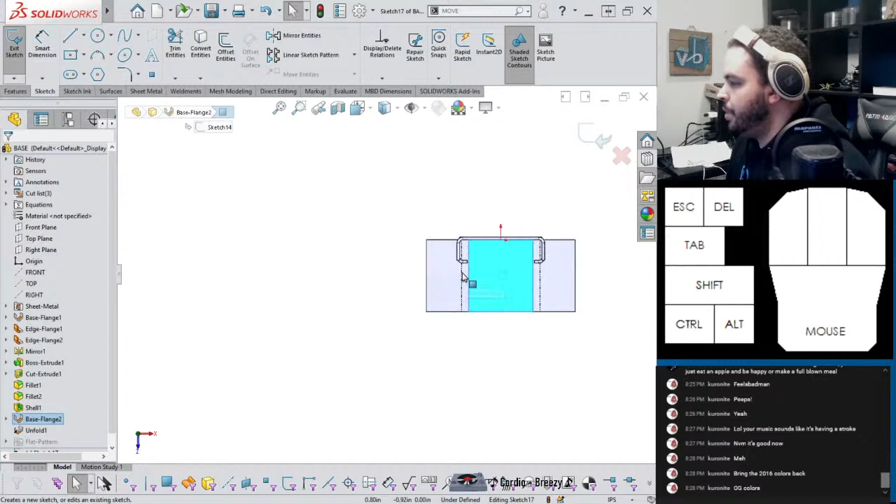Do I want to make this a precise fit? These are questions, aren't they? Yeah, I guess I will, just in case it might make mating it a little bit easier. But in reality, there would be a little bit of slop in there. Oh yeah, you like the unbend? Yeah, that's another under appreciated feature.

You've already been here for 10 minutes, already learning new stuff? That's perfect. That's what I'm going for here. That's why I try and select CAD models of the day to do on stream. If I think of an idea maybe the day before, I'm like, oh, actually, that's where I can show off this feature. I'll actually save it and then just try and think of something else for a non-stream day.

But yeah, this is cool because what you can do is start applying features. So I can say extrude cut, link to thickness, make sure the feature scope is only set to this, so it's not cutting anything else. And yeah, it looks bad now, but it'll fix itself once I fold it back up.

Additionally, oh, here, I bet at least 80% of you don't know about what I'm gonna do right now. So here's something. Draw a line. So what I'm doing here with this one line is I'm trying to emulate this. You see how this is like a slant? So basically this is folded flat, so I need to lop off this little piece here.

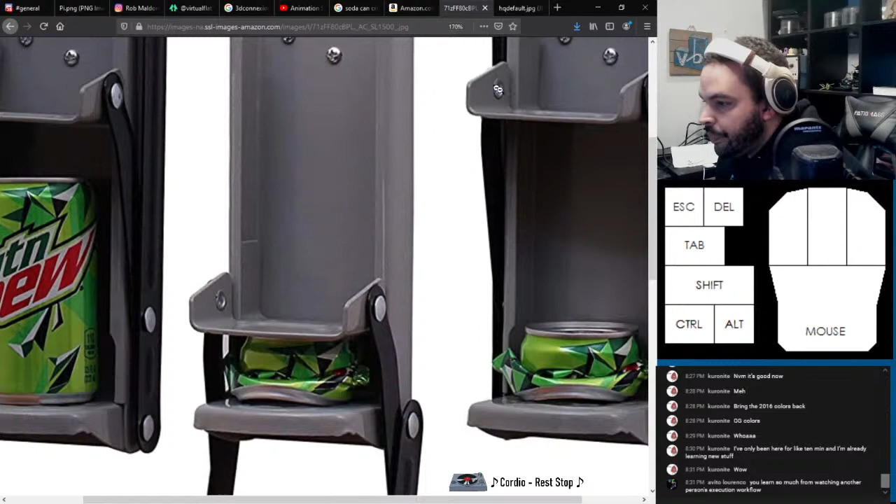So yeah, I want to cut this thing off, but you know, some of you may know that this might not be enough. Well, first, it's underdefined, so let me fix that. So I just need to define this. There we go, now it's fully defined. But this isn't enough information for the extrude cut to cut this, it's just one line.

And those of you who may know say, oh, I'll go get the line tool and start picking all the lines and make it into a closed shape. And while in this case you can certainly do that, what if you have more? What if it's full of contours and stuff like that that you need to select? So here's what you do.

You have the one line. You might have to search for this one. And what you want to search for is, let me remember, close sketch. C-L-O-S-E, close sketch. And let's see where this is. It's under Tools, Sketch Tools, Close Sketch to Model. So this is a hidden secret of SolidWorks. So if I click that, what you get is close sketch with model edges.

So look at where this yellow arrow is going. It's very light, but it's pointing to the left right now. Basically, it's trying to say, okay, you want to close this with the model edges. Should I go this way to complete the loop, or should I go the other way? I want it to go to the left, so it's going the correct way. So all I got to do is hit yes. And there, it just selects all the edges and closes up the sketch.

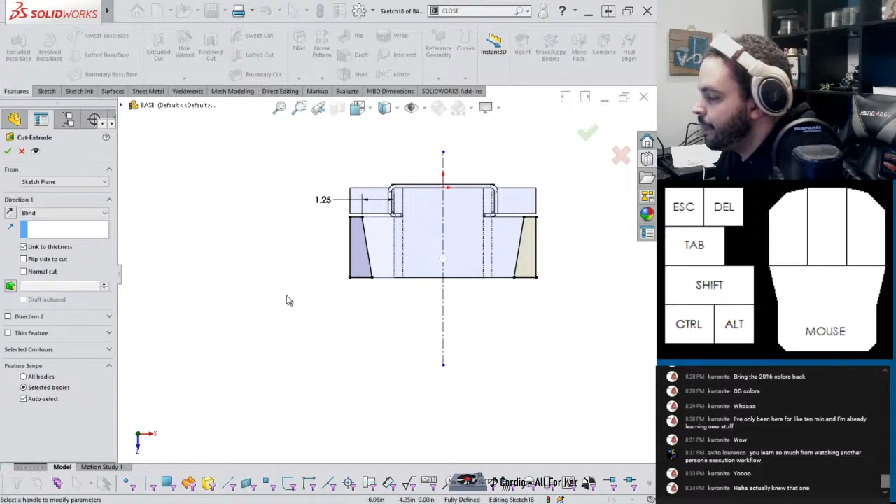Make sure we get this. Actually knew that. Oh, I'm actually very impressed. I'm very impressed. Like, I feel like that's a rare one. Well, that's good. That's good. Maybe, yeah. It could have been.

Alright, so now we have this cut the way we want, so we just go back to Sheet Metal, Fold, bends to fold, collect all bends, and there we go. It's perfectly fit in there. So I don't have to make all these sorts of sketches, I just design it when it's flat and then just bend it back up, and it's all good.

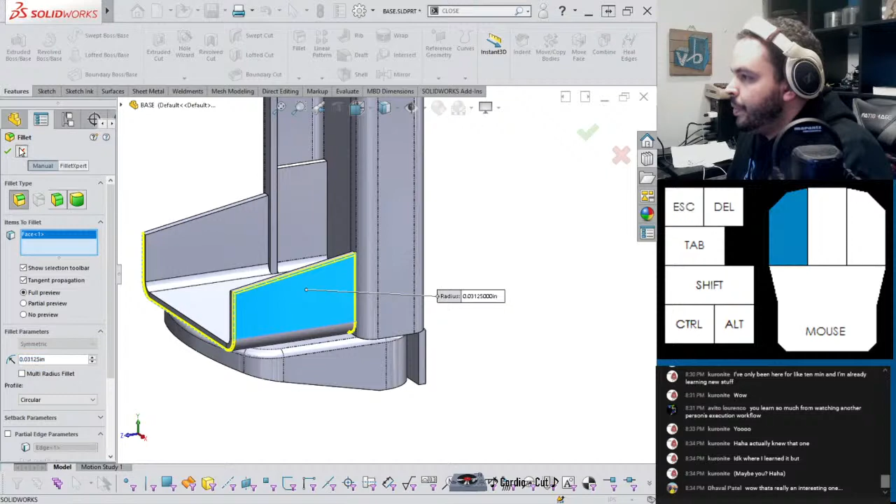So if I go to Sheet Metal, Corners, Break Corner, you can set it to fillet, set the size. I'm going to pick the same face and look what it does. It actually finds the edges and breaks them. So I can just click the faces, and I'm not stuck trying to handle these tiny little edges. So that makes that super trivial.

Man, it's a lot of granularity in that spin box. Yeah, and that's what that looks like.

Sebastian asking, what is the difference between lofted boss and base and boundary boss and base? I'm actually going to take a rain check on that question because that is such a deep rabbit hole. Yeah, and this stream is already on the longer side. I might have to answer that question next stream. I don't like to do that, but it is really that deep of a question. Just know this. I will say one thing.

If you can get the geometry that you want with a loft, then just use that one. In a lot of cases, boundary and loft do the exact same thing. I don't want to say exact, but it gives practically the same geometry. And if you get something that you like with loft, cool. You leave it like that. But no, it's a great question. It's too great, actually. It's too powerful of a question for right now. Oh, glad you understand, dude. No, I want to do that justice.

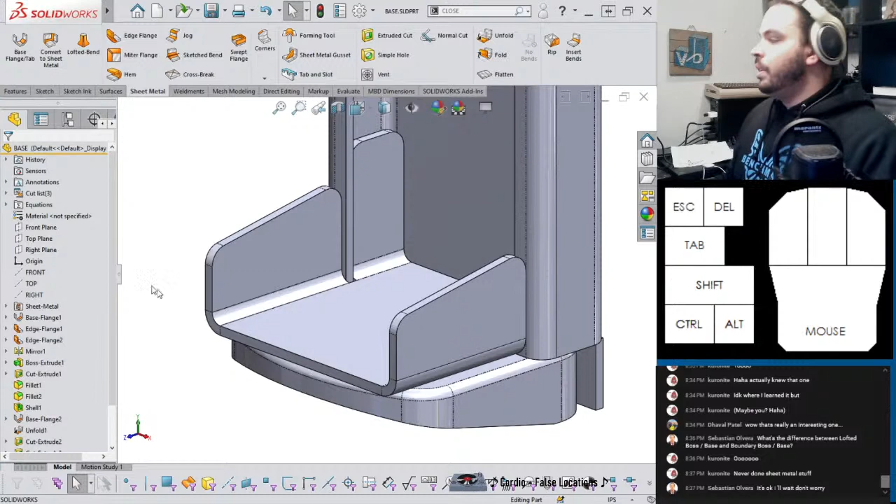All right, so we have the slidey bit in there just fine. It fits basically perfectly. So now, what's next? It's not much. We have a linkage coming down here.

Fine then, keep your secrets. Yep, that's me. That's too funny. Yep.

Yeah, so I'm gonna model that. Well, actually, I might model that in a separate part because I do want to be able to control the length of this and the handle too. So yeah, I think it's time to start making the assembly. So one thing that I'll do here is say save bodies, and I actually only need to save one. I need to save just this one in its own part file because these two I'm gonna keep fixed pretty much. So we want to consume.

Yeah, no, that's a fine name. Whenever you use this, especially if you work in an actual environment, you should actually rename these. Yeah, let's create the assembly. Why not? Soda can crusher ASM. Okay, so it'll save that out and put that in its own assembly. So if I grab the new assembly here, why does it always put me on appearances? That's annoying. So insert the base. So basically reuniting them. But now I can say float.

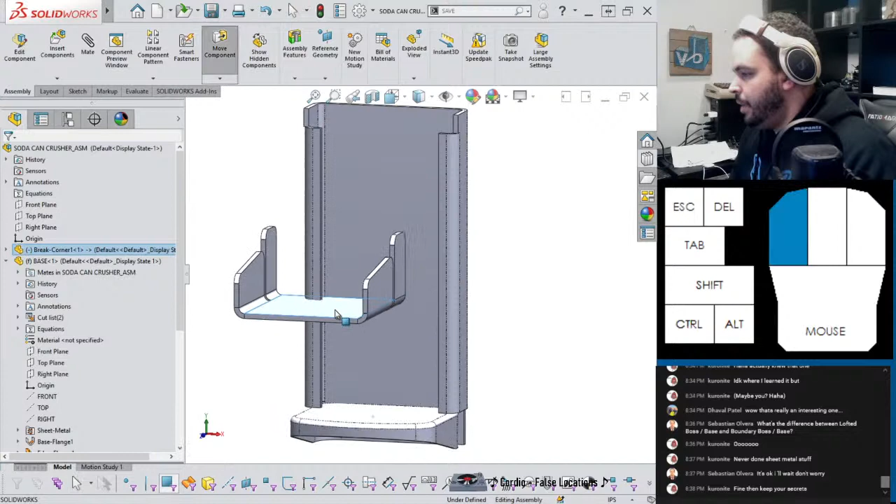Yeah, and now how do I want to do this? I'll make the right plane of this with the right plane of that coincident. And why? Oh, I goofed it. I totally goofed it. Fix. Float. That should be right. There we go. I might have to re-add that. It's all good, because I goofed it. Why? Oh, I did the same thing. I need this right plane with this right plane. There we go.

So this can just slide along this. So now this should be free. Like that. Let's take a look at our picture again. So if from here to here is 4 inches, then this thing looks like 5 or 6 inches long. So I'm just gonna try 5. And actually I have to punch the holes in the base and in this part. So let me punch the holes in first. Oops, that's the wrong thing. Let me go into the part.

I'm not sure how I want to do this one. My 2 center lines, say make equal. Oops. All 3 of these are equal, so that should give that a specific location that's kind of central-ish to that region. 2.5. Let's just do that. And ideally I should have this on the right plane, so I can switch that. And we'll take that, extrude cut. Okay, so that's that.

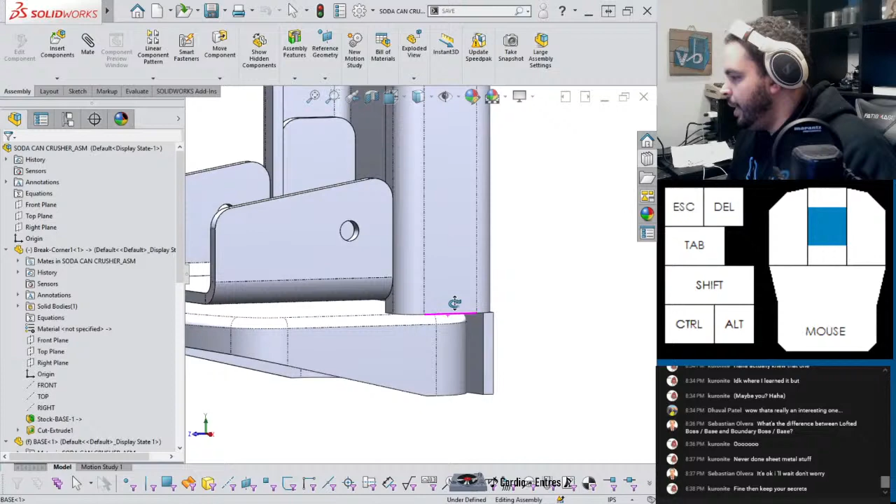And then, did I goof this up by making this round? Hang on. I think I did. No, really. The first flange needs to go all the way down. I've modeled rivets previously, and a lot of times if I'm running low on time, sometimes I'll ignore them, to be honest, but I'll show you how I do that. Let me roll this back to the first edge flange. Set this to 0. This needs to go all the way down. And then this, edit. Like this. Oh my god, I almost put that exactly 1 inch.

And then hopefully let's roll down and pray for the best. Okay, Boss Extrude is a little angry. What are you angry about, my dude? Someone steal your sweet roll? Oh no, it's not the sketch? Hang on. Oh yeah, it is. Why are these black? Alright, well, let's fix these. No problem, my dude. I'll just snap you. Say, make pierce. I might even just put a dimension of 1 on this.

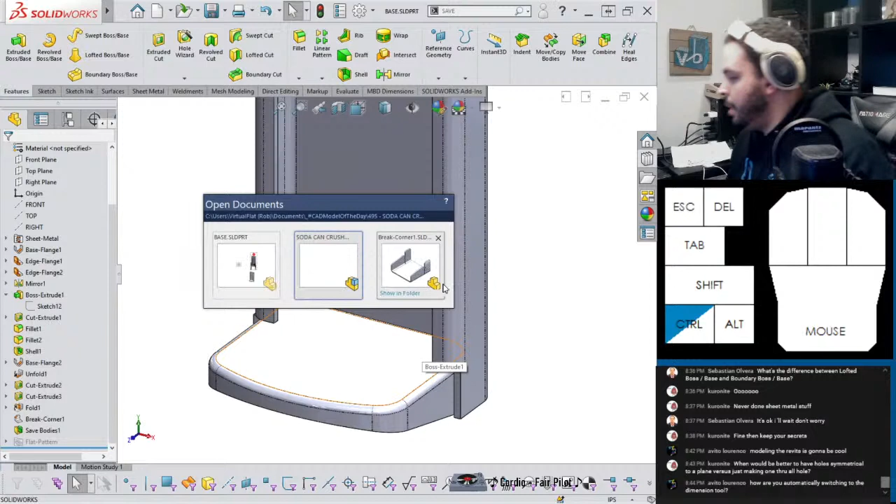When would it be better to have holes symmetrical to a plane, just making one through all hole? Okay, so that's another great question. Previously I drew the hole on the one plane, and then I was like, nah, let me actually just do it on the right plane and say through all. So typically, if you can have it on a mid plane and say through all, that will always be more robust than just putting it on a face. So what I did there is what's called reducing the dependencies of the sketch.

Let me go back and we'll check it out. Let's go back to the sketch, and I think I can just put it out here with no consequence. Yeah, so no consequence, right? But here's something I'll show you. If you right click the corner of the tree, dynamic reference visualization, you can see who's the parent and who's the child. If I hover over sketch 1, you see that its parent is the stock part that I saved out.

And the stock part can change. Maybe one of the changes in the future is that instead of these bends being at 90 degrees, I have it at 85 degrees for some reason. And having it on that plane can mess things up if the design is not completely consistent. It's depending on something that can change. Whereas if I take sketch 1, edit that sketch plane, and put it on the right plane instead, you'll see that sketch 1 changed its dependency.

The thing is, I put the edges of these lines to the edges of these, right? So there's still some dependencies there, but at least with the direction of the holes, the right plane will always be there and it's unmovable, undeletable. So I like to make things depend more often on the elementary planes than on other pieces of geometry that can move around.

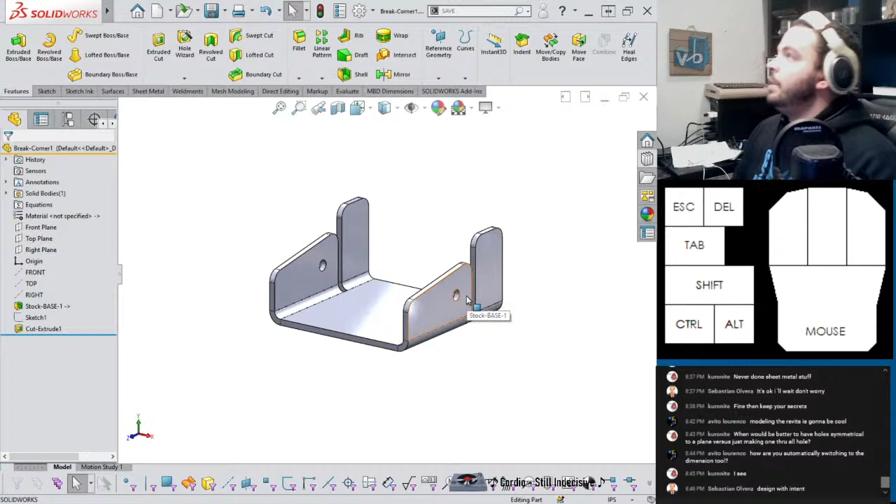Design with intent, exactly. That's exactly the point here. The intent is that I always want these holes to be straight, because if these holes are at an angle, let's say because the angle of this flange might change, then the mechanism will bind and it won't work. So the intent is I always want these holes to be coming straight out. That's a great example of design intent. It's a great question.

And that's what I love when people tell me to pause a little, because these are things I do without thinking about. That's what I meant to say. Guys, that was tough.

Yeah, going back here. Let's see. Oops, I'm gonna have to fix them. So I'm doing the same technique I did with the other one. Make all of those equal, make that vertical, and that gives us a central location. Second nature, yeah, and it'll be second nature to you too soon.

I try my best to point out what I'm doing, because when I was learning back in college all those years ago, I was highly dependent on YouTube stuff, and I was struggling with a lot of it. Going back to the cooking analogy, it was a whole bunch of recipes on YouTube, but no theory as to why those things go together. Like, why do cookies taste good with milk? Anyone could say just dip the cookie in the milk, but why does that work? I actually don't really know the answer. But that's the answer I wanted: why does this work? And there were really no answers for that. So when I started my channel, I wanted it to be something different.

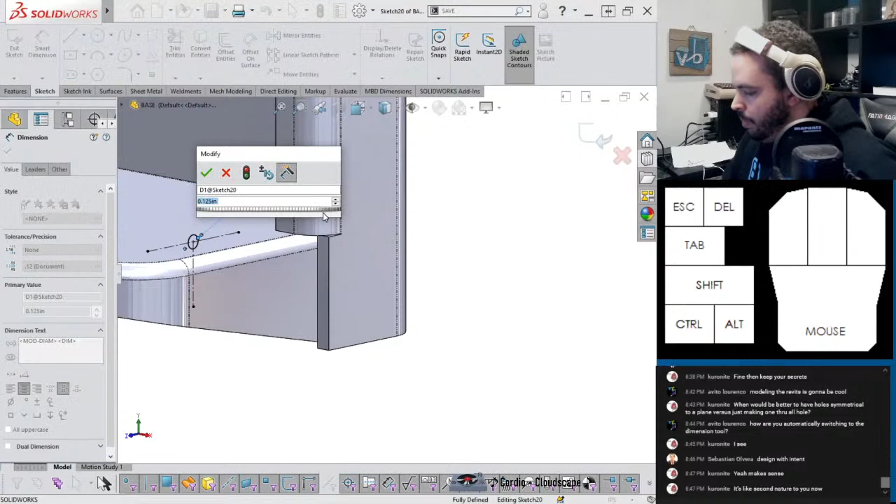I think I made this an eighth on the other one, didn't I? Yeah, so we'll leave that there. Let's go here. So now we have the two holes. We can make one of the bars right now, and that'll be very simple. I'll even just make a new part for it. A center point straight slot. I'm just gonna make this 5 inches.

And then I have some holes here. Got a multi-contour sketch going on. And then bump up the thickness. And there, that's it. Short link. Let's go back here, insert components. Short link.

Oh, Vito asking a great question. In the industry setting, do you guys use extrude cut holes, or is it strictly Hole Wizard stuff to have a properly dimensioned hole in the drawing? Great question. I would say it's highly variable, but I think if the placement and tolerancing of holes is important, which it is for most cases, you know, I'm just dorking around with a mechanism, but Hole Wizard just has so much extra information when it comes to tolerancing, especially getting that information in the drawing.

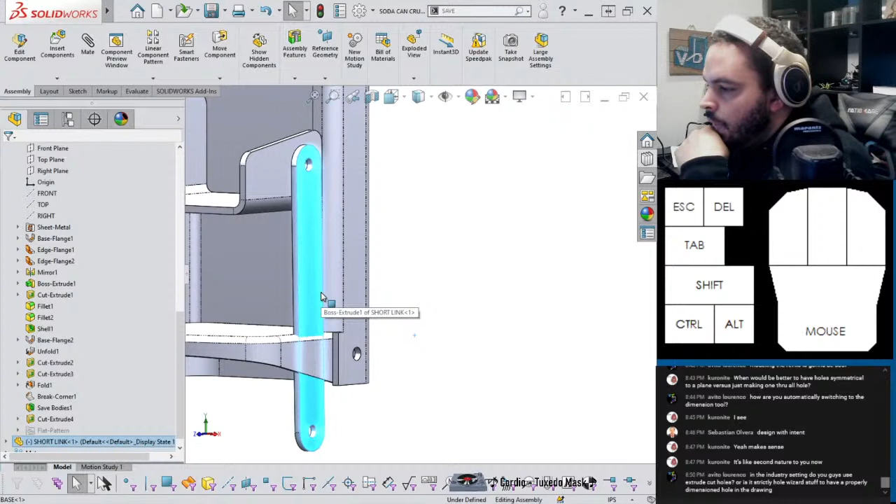You can often configure the Hole Wizard stuff to... oh, that is peculiar. I'm gonna have a jog in this. So yeah, I would say if you're not sure, see if Hole Wizard has it available for you. I just did circle holes because I'm being a little lazy, but it's all good. But yeah. I hope that makes sense.

Alright, so I'm gonna walk back on what I said. Well, not the thing I just said, but using a boss extrude. I'm not gonna use that anymore. Instead, I will use sheet metal, just have it the way we had it. Okay, so this might have seemed kind of silly. I deleted a boss extrude and instead put a base flange, and it's basically exactly the same thing. So why did I do this? It's because of this next part.

I'm gonna use a sheet metal feature, and to use a sheet metal feature, you need a sheet metal part. A boss extrude is not a sheet metal part. Until you see the sheet metal folder and the flat pattern, you really won't have access to any of these. And the thing that I want is jog, but before I click that, I actually need to draw where my jog will be. Wrong face. Sorry guys. This face. And I'll have a jog going right through the middle, just like this.

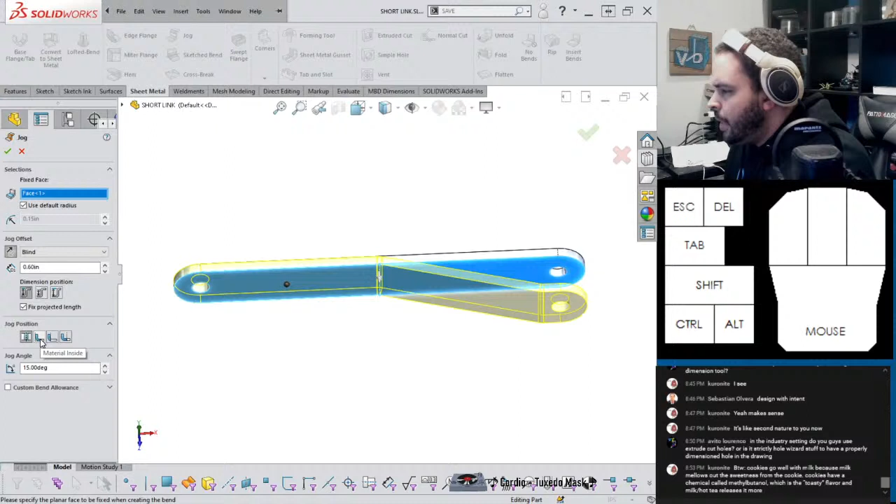So jog. So what this does is, well, that. I'm gonna have this thing bend around the geometry so it actually kind of fits. So center bend. Is there any other option for this?

But yeah, we have a jog here. Should I have it more extreme? Yeah, that's looking pretty good. It's uneven, but that doesn't really matter to me. And I actually should have measured how much that goes. Overall dimension.

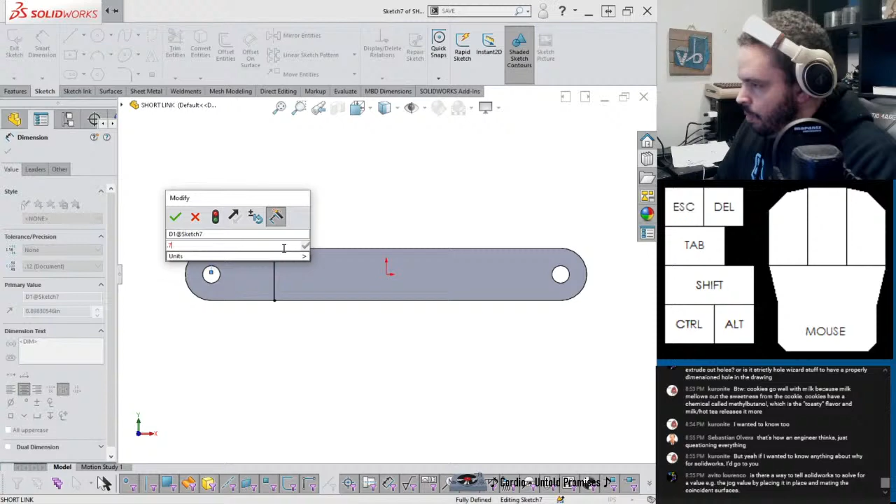And let's see, give a dimension like that. 7.5. So now this will bring the jog way back. More angle. And I notice the jog went the other way. Oh, yeah, okay. You see Mr. Black Dot here? He tells you what the fixed face is. So which face do you bend up and which face stays where it is? This black dot doesn't move, so to fix this, I gotta move this black dot to the other side of the ring. There we go, fixed.

Is there a way to tell Solidworks to solve for a value, e.g. the jog, by placing it in place and mating the coincident surface? I don't think you can do it with the jog tool. I think you can do it with surfaces, like have a sketch of this thing as seen in profile, a top-down assembly where you're defining the sketch with relation to the part, thicken that, and then if you want, you could even convert to sheet metal if you need to see a flat pattern. But what I really like about the jog tool in particular, and why I'm okay with doing the trial and error thing, is...

it's mostly this thing, fixed projected length. So it calculates how much longer this thing has to be in order to actually make the two holes rest exactly where they are. So this is great because that means I can adjust this jog however I want, and those holes will always be 5 inches apart, which is awesome. If I don't, you can see because I'm bending it this way, this flange is getting a bit shorter. But fixed projected length, you guys are asking the best questions here, that's why I'm using that. And there, that seems to be much more functional. So it doesn't go all the way down, but it doesn't need to, because you're not gonna squash a can perfectly flat, right? So I think that's gonna be acceptable.

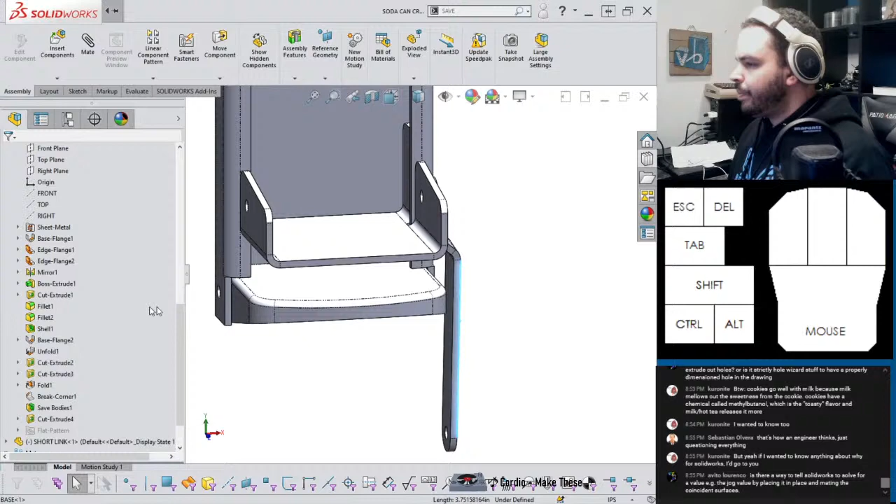All right, so I need to get the handle now. We're almost done with this thing. Yeah, so it looks like it's on the outside of this, going here. Yeah, I guess I should make the jog actually go in here, because the thickness will make this line up and I'll just be able to have a straight linkage. All right, no surface development stuff.

Yeah, I guess not today. Maybe the thing is, for the entire month of March, I really am trying to do this mechanism challenge, and by nature of it, most of them are just blocky and prismatic. I'll think of something, because I can also knock out what's the difference between boundary and loft with surface development things. Yeah, so that's something I gotta think about.

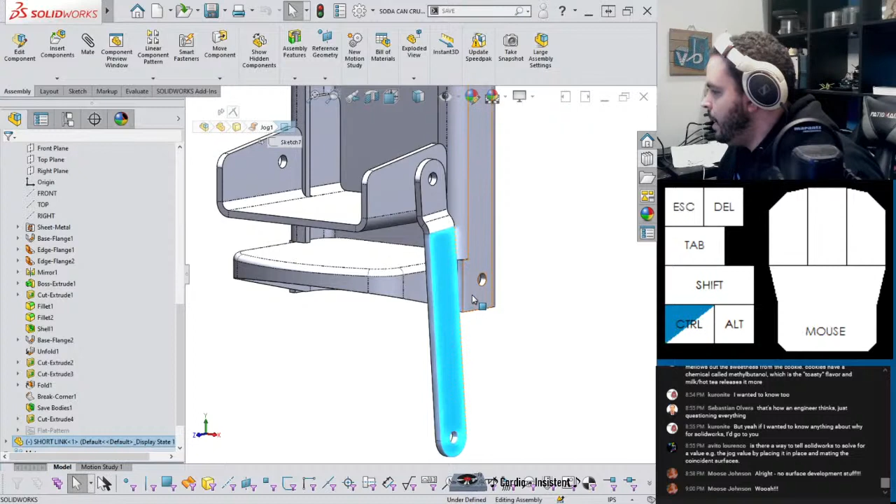So 150 thou is the value. Let me go back here, hopefully for the last time. Interesting. Oh, I guess because there's no flat, because it's just two bends touching each other, that's why it gave me that. Alright, so now that kind of perfectly fits into there, and this should be basically coplanar. Or be 5 thou off. I'm not really sure what that is, but okay. But something we can deal with, not too big of a deal. Oh, I whooshed it, yeah, I'll do that sometimes.

Alright, so let's take a... So these are pretty... I was wondering, have you seen... Yeah, honestly, if this was a production thing, I would actually fix that. I might try and... I have an idea of where that might be coming from. So these are like 3 inches, I'm just gonna guess. And then you have an arbitrary length handle.

So if I go back into here, I'll investigate for this actually, just put it to this. Oh, I did this as a blind value, didn't I? I should have done up to surface for this, just like Avito would suggest. So I'm just gonna do up to surface, so that's why that was being weird. Yeah, from the bend edge, because the thing is, the design value is like 4, but you have to add the thickness of the sheet metal, which is not always perfect. Alright, so things do seem to be functional here.

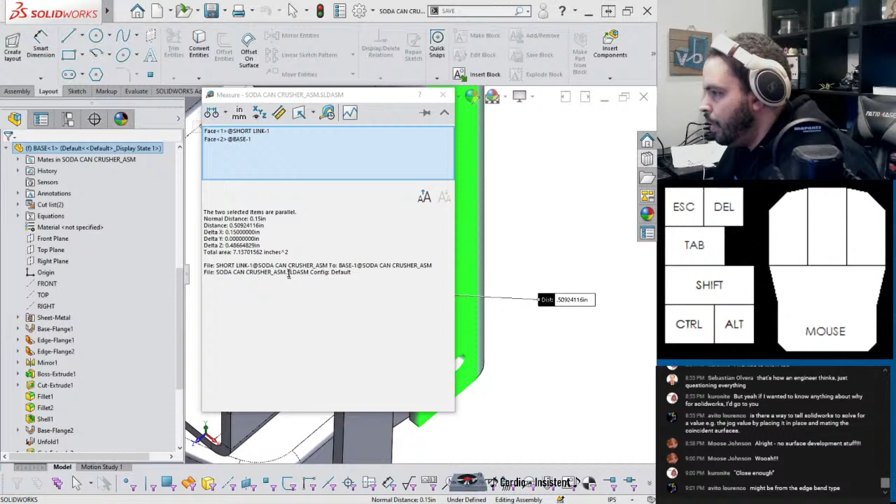Let me hit rebuild. Or I guess it might come from the jog. Hold on, I mean, if I say from here to here, so a clue. Oh no, because that's... Oh yeah, that's what it's from, because that's like a nice round value. Yeah, so what's happening is this has like a weird decimal for the thickness of the sheet metal. I'm pretty sure that's what it is. I could keep investigating, but the stream's got to end sometime, you know.

But let's move on to the handle. I'll still be able to make it work, it'll be fine. And plus 5 thou, that's something you can actually bend in the sheet metal. And sheet metal is very interesting as a whole concept. So I think I'm just gonna start with a handle, maybe have a 1-inch handle going across mid-plane 4 like that. So we have a bend downward and then it comes out at an angle, which I can deal with. I think that'll work out nicely. So I'll start here.

And let me try something. So it comes down. Do I want to put the curve in now? Sure, I'll do that. So I'll give that a value.

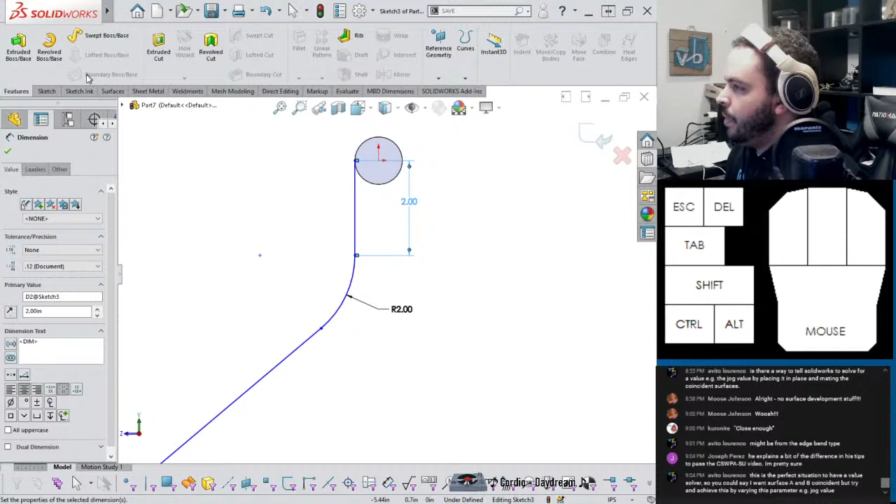Oh, good point, Joseph. I actually do go over that a little, and I think it's mostly analogous to the solid body variants because I go over lofted and boundary surface, but there's also a lofted and boundary base. A lot of those will be the same thing. I think I even have it time-stamped, if you're really curious. Thanks for the catch, Joseph.

This is the perfect situation to have a value solver, so I could say I want... Yeah, that's true. That's something I'll look into.

But you know, for right now, one of the important things—I think past me would have stopped at nothing until that little 5 thou discrepancy is resolved. But what CAD Model a Day taught me, with like 494 successful posts in a row posting on time, not missing a single day, is that sometimes you don't have to be perfect. And that's hard for me to admit because I'm such a perfectionist when it comes to this stuff. You just got to cut it off somewhere.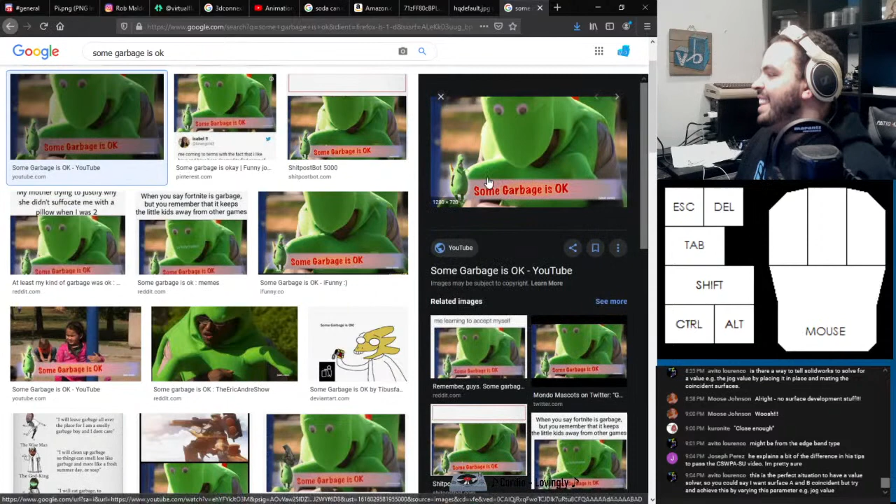Like here, what does that mean? Yeah, this—so it's a video. I didn't—oh my god, I didn't even know this was a video, dude. I just saw this clip, this still. Some garbage is okay, but yeah, CAD Model Today, one of its core principles is: sometimes you just gotta get it out. Some garbage is okay.

And obviously take that with a grain of salt when you apply it at work, because the reason I'm so lax is because I'm just studying a mechanism right now. If I was sending this to production, you gotta figure it out, dude, or else something could be scraping or something like that.

I want the overall length of this thing, so I need the virtual sharp between these two lines, not the virtual flat—that's my name for it. Virtual sharp: I can grab these two lines, go to sketch, hit the point tool, and that generates a virtual sharp that I can click and define a dimension.

So let's grab select chain, offset, reverse, add caps with arcs. So what that did—I offset, added the cap with arcs, and that should be fully defined. No, I don't think this needs to be a sheet metal part either.

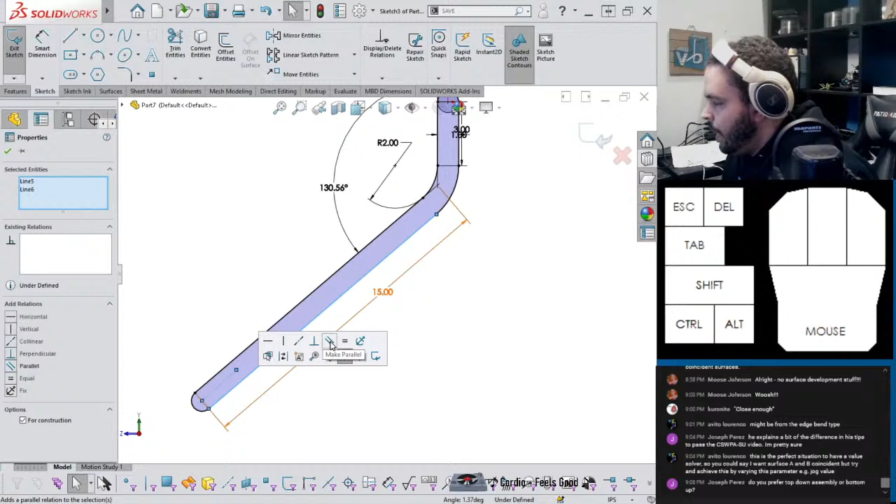Joseph's asking, do you prefer top-down assembly or bottom-up? Honestly, it's very situational. I think I do find myself doing top-down more often than bottom-up, though. But bottom-up, sometimes you just want to keep something simple, focus on something and not have everything around. So I wouldn't say use one over the other, but yeah, let's say top-down if I had to pick one.

And actually there needs to be a hole at the end, I just realized. Oops, I killed my little circle.

Yeah, that's basically what I do—if you check the past couple of streams, that's basically what I've been doing. Like the gears from earlier, I was using top down, but then said, oh, for this, let's just put it in its own part file, do it bottom up. So you don't have to lock yourself into anything in particular.

Okay, and we can mirror. And handle. Now I can go insert, get it into place, get those concentrics in there. Concentric. And then what I'll even say is that the right plane of the assembly, I put those in the same place.

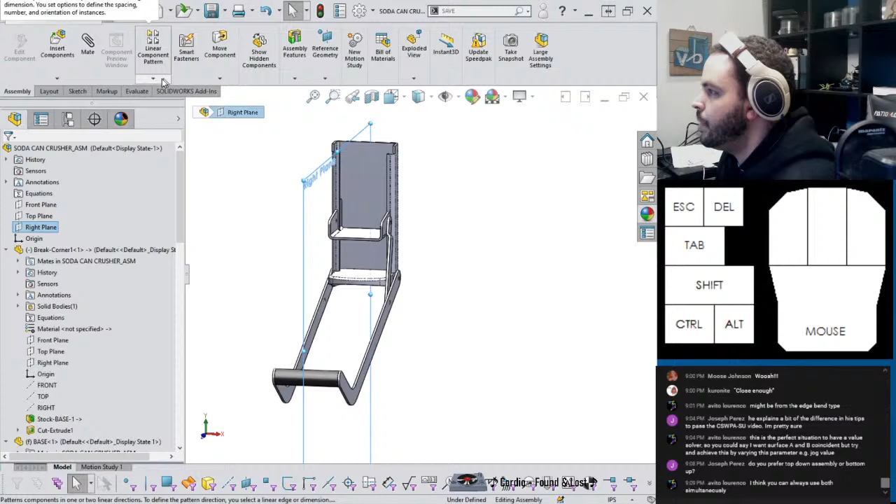Since there's no mates between the thicknesses of the sheet metal, that little discrepancy won't give me any mate errors. But let's do—I need a component mirror for this missing linkage. I always lose it, here we go, mirror components. And we want this. And that appears to be correct in terms of orientation.

Pretty good. I think these links might be too long. I'm going to take this down to 4. That's better.

I can feel the increase in torque by how the crusher moves slower. Yeah, for sure, dude. If you move the handle at constant speed, you can see towards the end of its stroke... oh no, go back. Very interesting. Let's see how much space I have here compared to...

Okay, so this one's a bit shorter. Up 5.5. I think the Amazon listing advertises 7. Well, that's okay, it'll be for short soda cans.

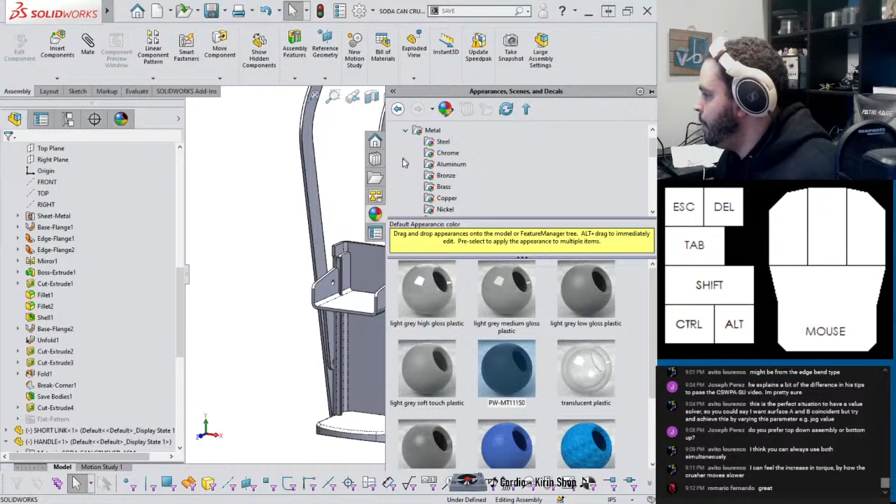Let's put it like that. Save. And yeah, let's put some colors. Some garbage is okay, that gets me. I like the color scheme of this, so I'll probably just copy it. But instead of painted gray, you know, can't go wrong with like brushed steel.

On these bad boys. And then, oops, wrong button. And then black on the linkages.

Well, I think something I want to do in the future is try and animate a soda can actually crushing, like how I did the Crash Bandicoot crate bouncing. I showed this earlier in stream. Here, I'll pull it up.

Basically, if you look at my animation secrets from CAD Model Today thing, I made this crate that bounces in Solidworks. Yeah, this thing. So I'd like to try and make a soda can crush, but I don't think tonight's the night because this as-is is super involved, and I think crushing a soda can would be even more so. But that's okay, because we could still show off the mechanism as is.

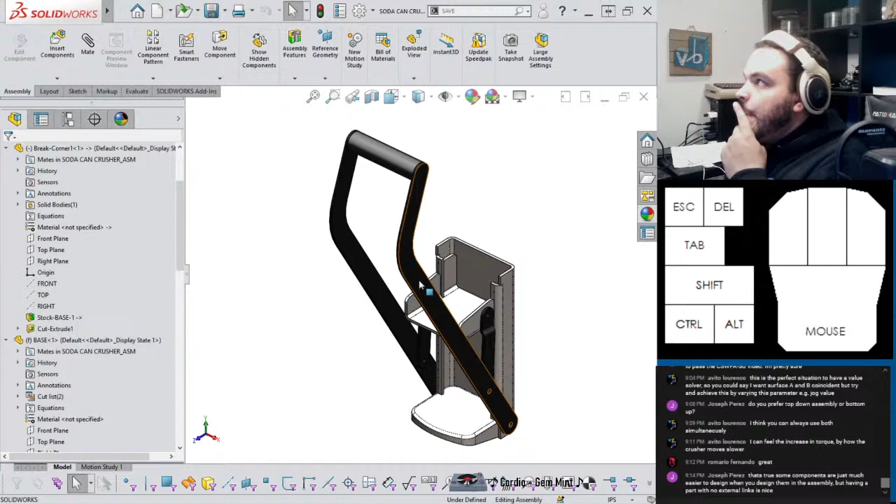So it's a ton of control, and I think at that point it's all about comfort. Do you like seeing everything else in the assembly while you work, or would you prefer to focus? I think that's very situational.

Set this like this. Get this centered up like that. Joseph's saying, I've never used a value solver.

How would one of those work? I don't want to say there isn't a value solver - there definitely is. You can use design studies to find the perfect value to meet some criterion, like adjust the thickness of this thing until the overall width becomes this, or keep adjusting the thickness, and you could throw simulation data and say adjust the thickness until the peak stress is under this value - that's under evaluate design study, but that's another rabbit hole. Yeah, I think I'll leave that one alone for right now.

So let me try this. Oh yeah, I guess I didn't put rivets in this thing, but yeah, I think it's one of those nights, especially since I've been streaming for a while now, like over 2 hours. I think we just got to get it done.

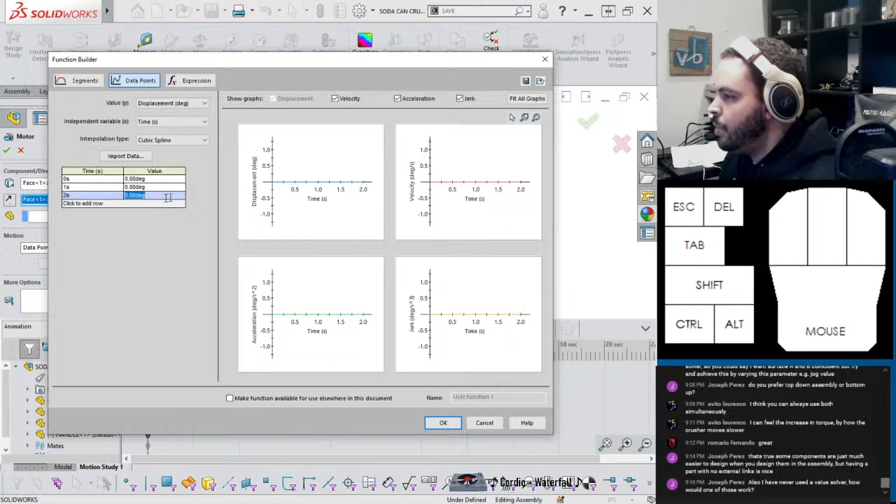Ooh, not about that. Oh god, I goofed this. Okay. And I think how I'll configure this motor, it's not constant speed, I'll do data points. And I'll do displacement. So at 2 seconds, do...

Cubic spline. So from here to here is almost 180, so I'm going to put like 165, because I don't think it's perfectly that value. So insert row above. Insert row.

So let's see how that looks. Yeah, too much. But that is the motion that I want. It looks like it's doing a squat, honestly.

So maybe down to 155. Yeah, still too much, I might just jump it all the way down to 135. Yeah, and honestly this is one of those things that I really should just grab the measure tool and measure in the two positions. It's all good.

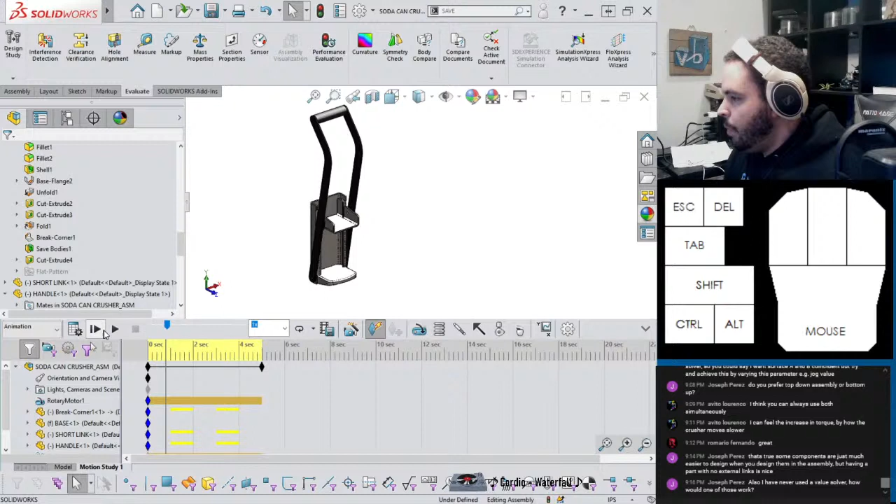I don't want that red arrow to show, so that's under the eyeball and this motion symbols. So now when I play it, you don't see that red arrow, because I think it's going to confuse people - it just shows where the positive direction is, but I don't think it adds anything here. The other thing I'll do is view, display, tangent edges removed. That'll make it look a little bit cleaner.

Yeah, the interesting thing is I'm not sure how I want to crop this, because you see the handle goes off the screen. So what I'll do, I'll zoom out like this, replace key. So now we can see the entire handle here.

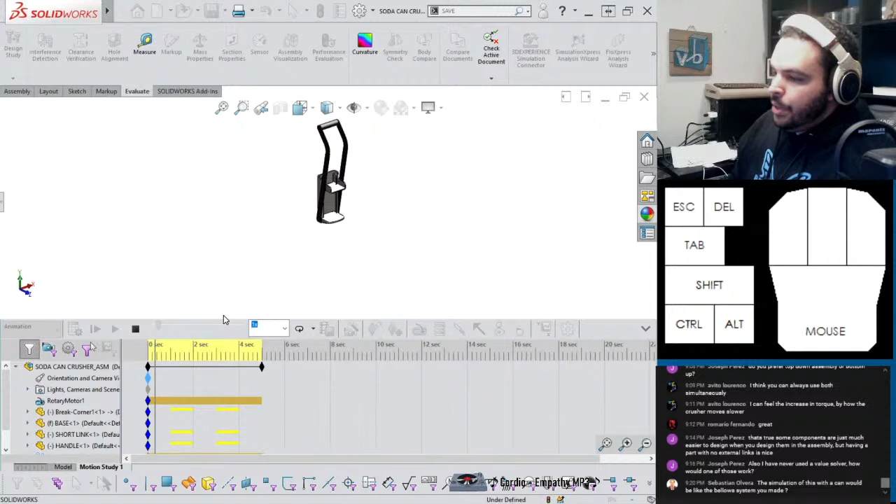And this should take some time, because now it's taking screens that are like triple the size that it normally would. But I think that will help. It'll give me options when I bring this into Camtasia, that if I want to zoom in, it'll still look crisp and good. Or if I just want to leave it out by its lonesome like this, I have those options. Yeah.

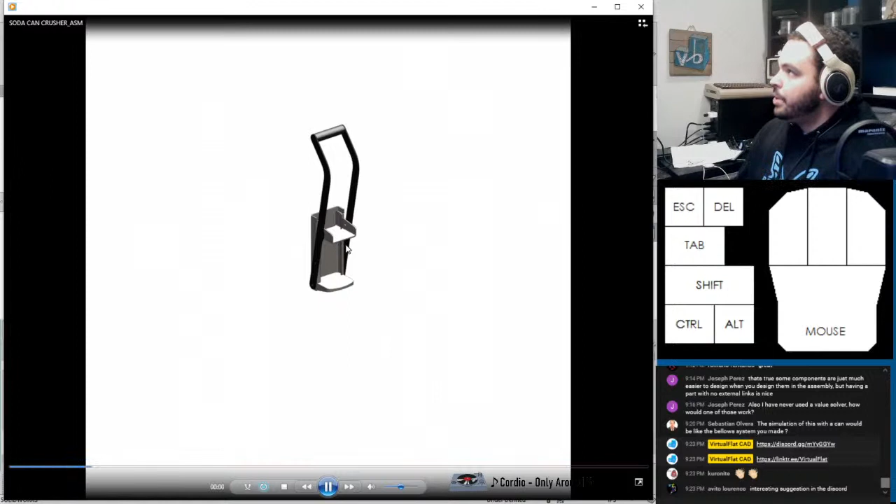Alright, so we got to the end, but I have yet to hear the ding. Because ding means done. No ding means no done. So let's see. There we go. That's what I'm talking about. Ding means done. And I can just go to my directory here. And let's check it out. I'd say that's pretty good. The lighting is a little washed out, but I think I'll fix that with the saturation controls in Camtasia. I think we're good with that.